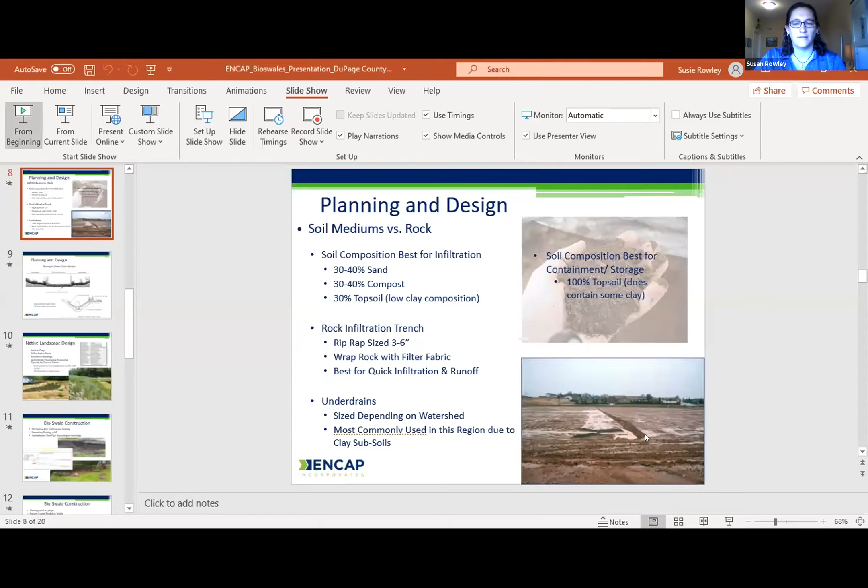And can you see that as well? Yes. All right.

The first being stormwater infiltration and capture. These systems can help reduce the runoff volume and also the runoff rate coming from a developed site. Some counties do allow for stormwater credits in bioswales and other BMPs as well. If you're going to get some of that capture, you might be able to reduce the size of other BMPs that are on your site.

Naturalized systems are also going to provide filtration and treatment. Carbon sequestration is just one of those. The main one we see is cleaning up pollution and things like oil, grit, and salt that are coming in from our roadways and parking lots. That's going to get treated when it goes into these naturalized systems, again, through those deep root systems.

This is also going to improve downstream water resources. Typically, these are just the first step in maybe a treatment of stormwater prior to it having to outlet eventually to probably a stream, or it may infiltrate into the ground. But either way, it's going to help treat the water before it gets released into those natural resources.

Two great benefits I see for wildlife habitat are goose reduction and mosquito reduction. Geese definitely do not like tall grass. They instinctually think that predators are going to be living there, and they can be, the coyotes and other things that can harm them. So they tend to stay in our turf grass. They love our turf grass. They don't go into those systems. So if you have more native plants on your property, you're going to get a reduction in geese.

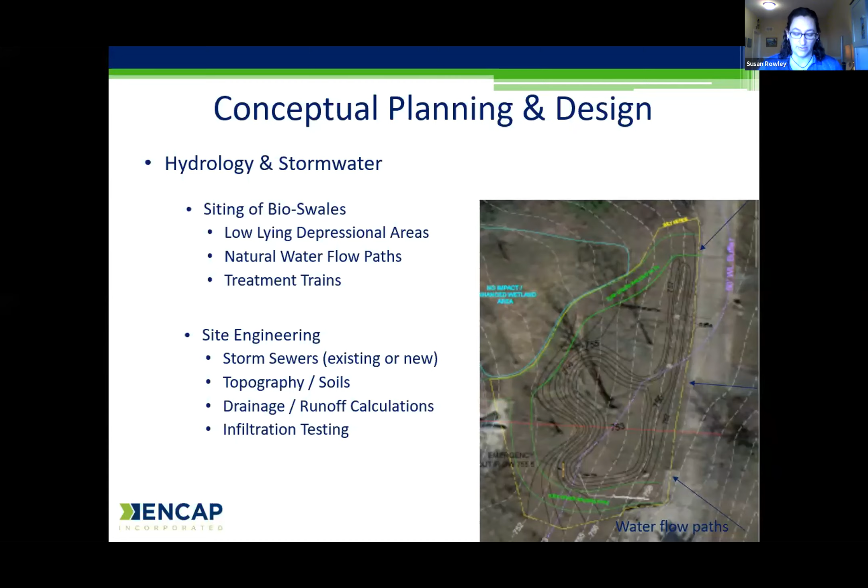It's also important to figure out what your project goals are prior to or during the planning and design phase of the project. Is your goal to reduce nuisance flooding? Is it to improve water quality or reduce non-point source pollution? Do you want to provide an open space amenity for the community? Is it strictly just to manage stormwater runoff? Do you want to also promote infiltration or stormwater storage? Or do you want to increase community awareness of the positive impact of these areas? Most likely your project will have more than one of these goals at a time, or might have all of them, but that's important to consider when planning your project initially.

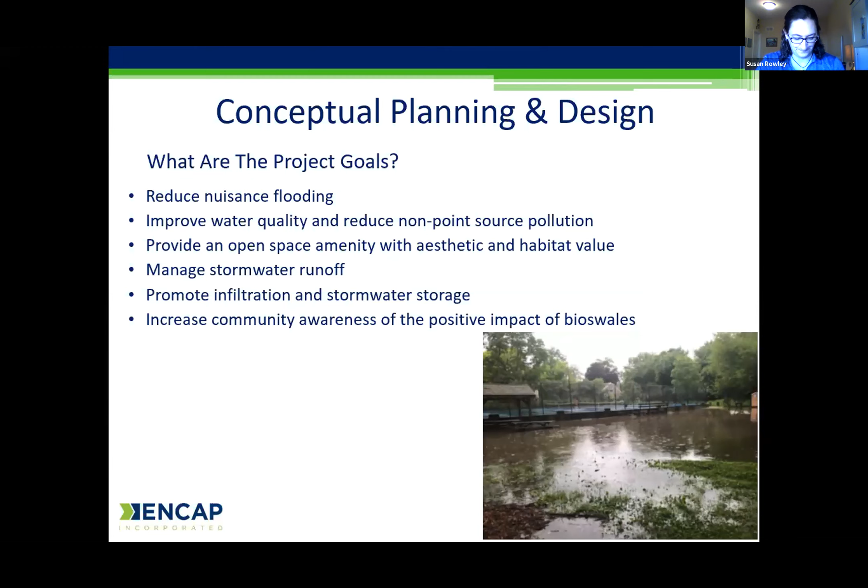Getting into a little bit of the nitty-gritty with the design, using soils versus rock. If you're looking to have higher infiltration rates, the best soil composition is a 30 to 40% sand mixture with 30 to 40% compost and about 30% topsoil, hopefully with a low clay composition. That's because clay is going to be more of an impermeable layer that you'll run into.

You might have a goal in your project to actually have more containment or more storage in your bioswale. Then you'd be looking at using more of 100% topsoil that does have some clay in it, so you get some of that containment that you might be needing.

For the best infiltration and runoff on your project, you might want to install a rock infiltration trench into the middle of your bioswale. We would recommend using riprap size 3 to 6 inches, and then wrapping that rock with a filter fabric, which helps with any sediment that might run off initially before the plants have established fully. It's going to catch that sediment so it doesn't clog up the system.

Also in this area, due to us having very high clay content in our subsoils, a lot of times these systems require an under drain. Those are going to be sized, again, depending on the watershed and how much water you have coming into your system and how much runoff you want leaving your system, but that's pretty commonly used in our area. It might be a little different if you're up in Lake County where they have more sandy soils and you might not need an under drain to help that infiltration.

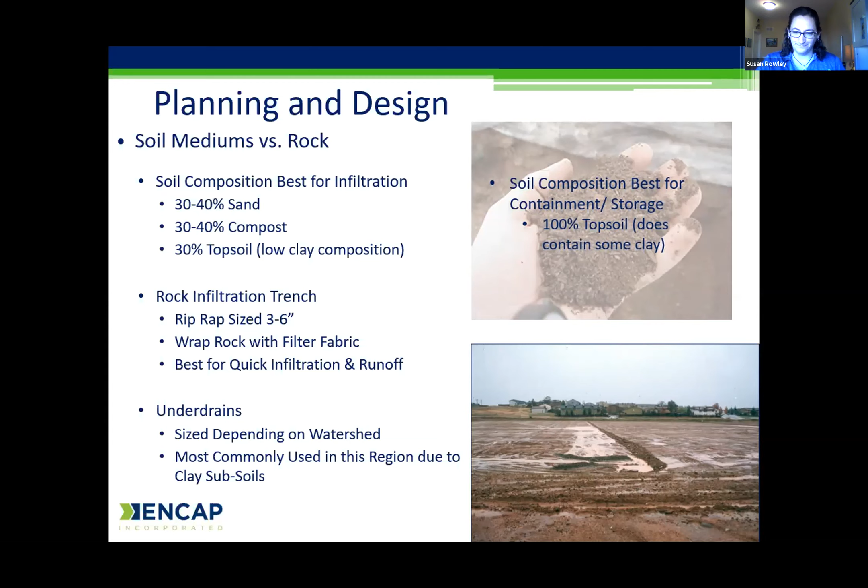Now we're talking about selection of plant material for your project. Again, the project goals are going to dictate what you want to install. If you're looking for more of a cleaner look, more of an instant result, maybe something that's going to be utilized by the public right away, and you want additional benefits from visual appeal, then you probably want to select plugs and mulch installation initially, because you're going to get more of that instant gratification than you would with seed. If you're able to wait for the results, then seed and erosion control blanket would be the way to go. These two pictures show the difference between plugging versus seed and blanket.

You want to make sure you utilize native plants that are native to this ecoregion and also suitable to the hydrology of your bioswale. So if you're going to have a bioswale with more water, you want to select plants that are hydrophytic and can survive in more of an inundation period in the water, versus if it's going to dry out right away, you want to select drier plants. Also, bioswales are typically in a visual spot that the public is going to see, so you want to pick aesthetically pleasing plants that also have a purpose. This plant list is just a short list we use on other projects for bioswales and rain gardens that are more showy. These include forbs or flower species, but sometimes grasses and things like that too, to provide that different structure.

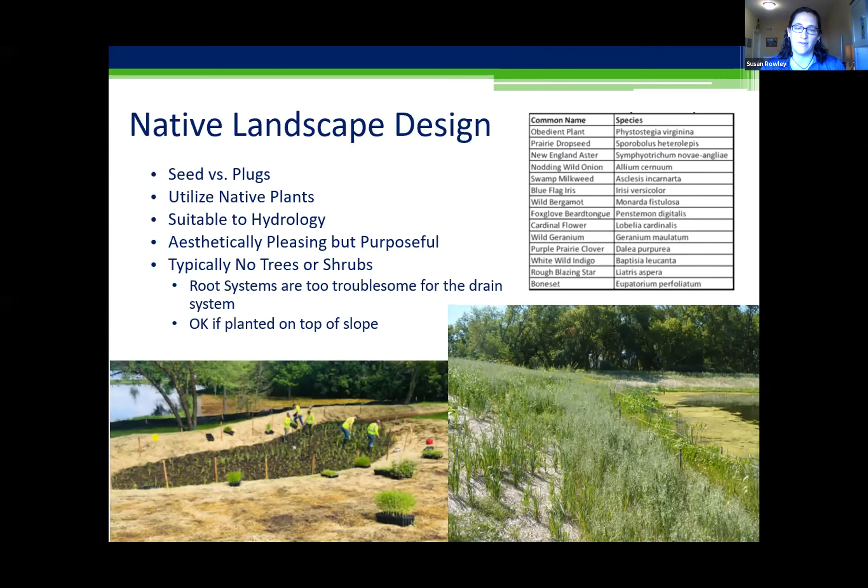So when we're looking at construction, you want to ensure that you install proper silt fence around your area, and maybe even some construction fencing. That's going to ensure that your site is protected as well as any adjacent sites. Obviously, make sure you call JULIE before you do any excavation or grading.

And most commonly used in these areas is heavy machinery, because it's going to be the most efficient use of time and resources to get the work completed. However, we would recommend, if you're going to be using heavy machinery, trying to use machinery that has low ground pressure. That way you get less soil compaction, especially if you're wanting to infiltrate into the ground. You're not going to want to compact that soil too much. If you can find the low ground pressure equipment that is about 10 pounds per square inch, that equates to about the human foot. That's what you want to try to utilize if at all possible.

Depending on your project and the design elements, you may or may not need to install an underdrain or riser pipe, depending on the hydrology. This is just a picture of one we installed with a riser pipe, because this project in Lake County had very high sand content, so we didn't need an underdrain in this case.

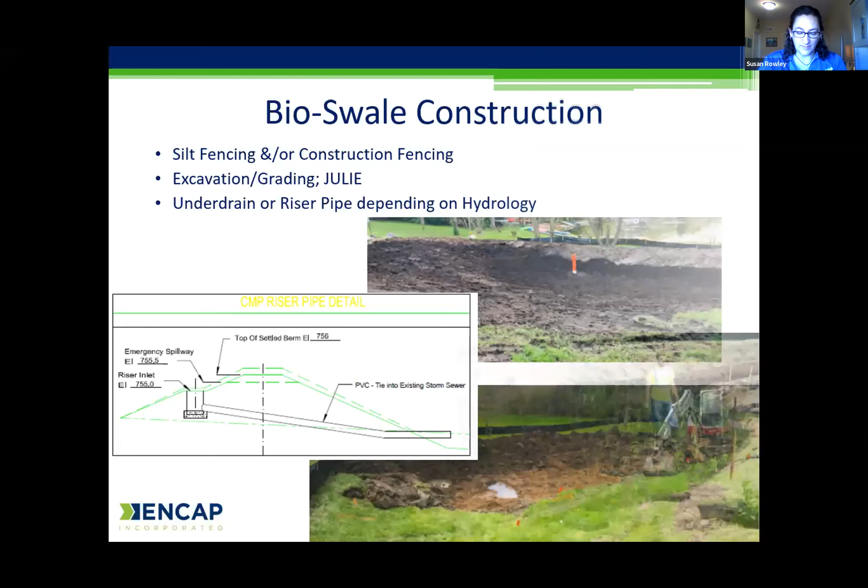Next comes planting. If you're going to use native seed and blanket, the native seed needs to be sown into the ground at approximately a quarter of an inch. You can use either a specialized seeder or do it by hand and rake it into the ground. If you're going to hand broadcast the seed, we would recommend doing it at two times the specified rate on the plans, because of the more uneven distribution you get during hand broadcasting versus it being drilled into the ground at a specific depth and rate with a drill seeder.

The proper erosion control blanket should be specified in the design stage. However, typical blanket utilized in a bioswale is an S150, a straw blanket, and that's if you're going to have no velocity or low velocity in your bioswale. If you are going to have some flows or water flowage in your system, you might need to use a heavier blanket - an SC150, which is a straw coconut blend, or an even heavier blanket that's all coconut fibers. The straw fibers of the blanket are going to break down much more quickly, which is why it doesn't hold as long. They usually break down in 2 to 4 years, versus the coconut, which takes longer, maybe 4 to 6 years.

Versus if you want to do plugs in your bioswale, you want to plant them in a hole suitable in size to hold the diameter and depth of the plug itself with its roots without damage. Then the soil excavated from the hole should be used to backfill around the plant and lightly pack it in.

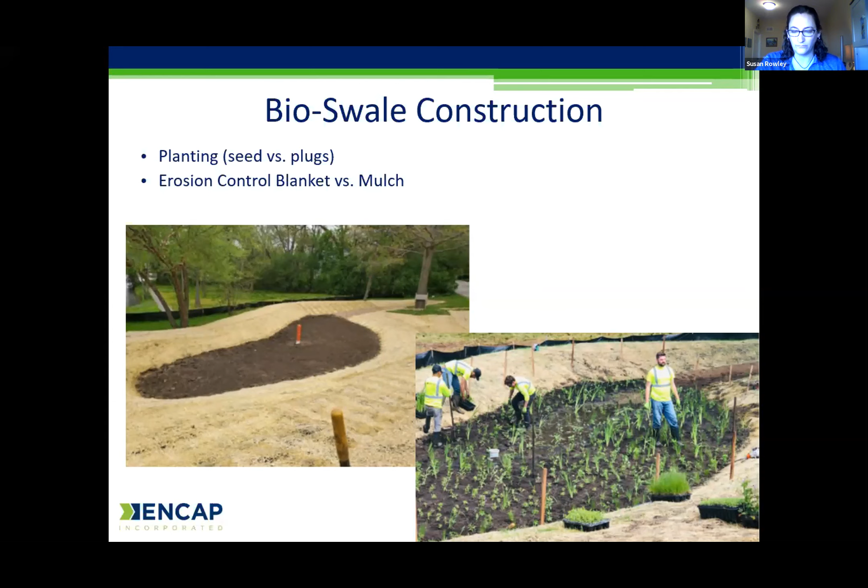So we get into the maintenance.

Timing is everything on this, and it's important to really be patient when it comes to native systems. Native areas take approximately 3 to 5 years to develop into maturity, and it's going to be a lot different than the instant gratification you might get from a turf, tree, and shrub sort of manicured look.

Typically, maintenance is conducted every 4 to 6 weeks, and this can include a wide array of things listed here.

If you're going to hand weed, you want to make sure you pull out the entire root system on your smaller sites. Otherwise, hand wicking or spot herbicide application. In Illinois, you need to be a trained certified applicator in the state to apply herbicide, so you want to make sure that's qualified personnel doing that.

You do hand cutting with hand machinery, or maybe mowing with a weed whacker or something like that on your bigger sites. You might need to remulch if you get some larger storm events, or replace some of the mulch, or replant as necessary.

There might even be some plant removal that's needed. We had a couple of projects where some of our native plants were actually out-competing our other plants that we planted, so we wanted to remove some of that growth so it didn't overcrowd.

Prescribed burning may or may not be needed on your project. If you have a smaller site, it's probably not needed, but on some of the larger sites it can be beneficial. Again, qualified personnel who are trained in prescribed burning should do that.

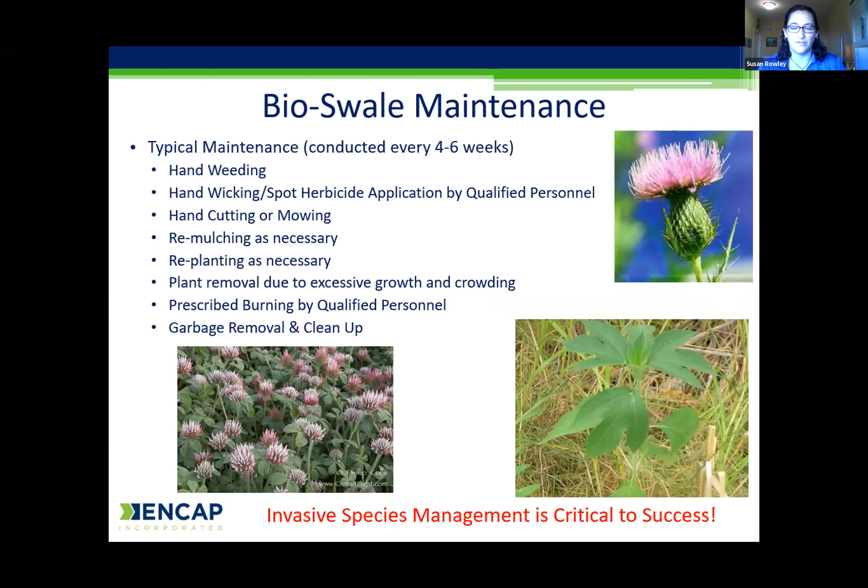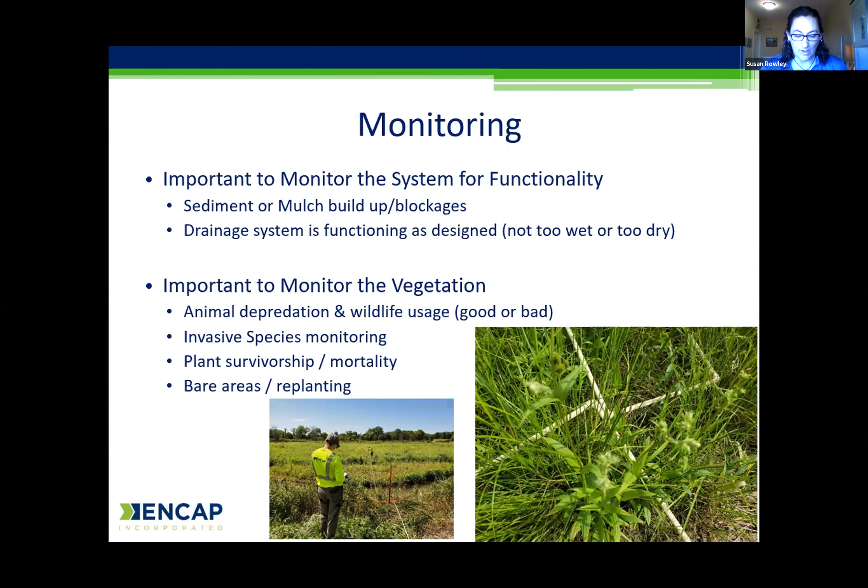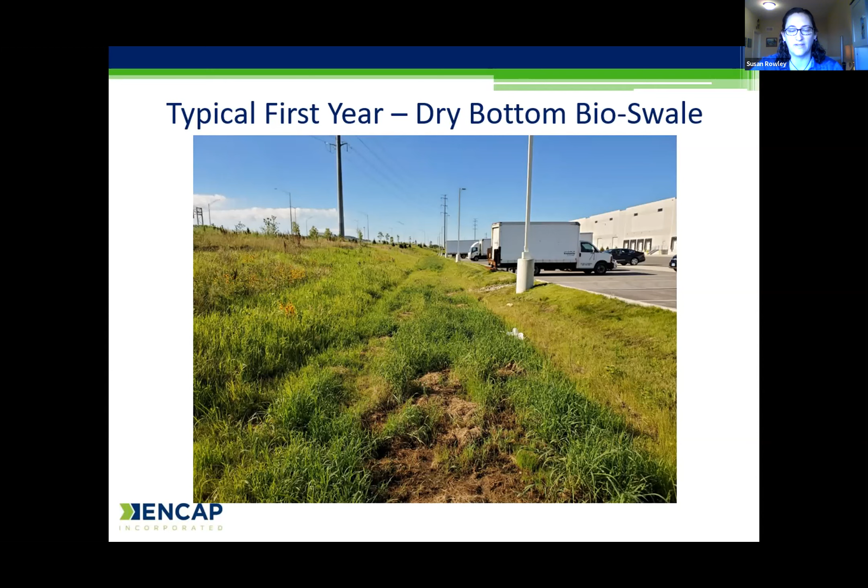Here I wanted to show a typical dry bottom bioswale. This is in the first year of development, so it's not very showy, mostly grasses at this point. However, it is functioning as designed, it's stabilized, and we know over time it will continue to develop.

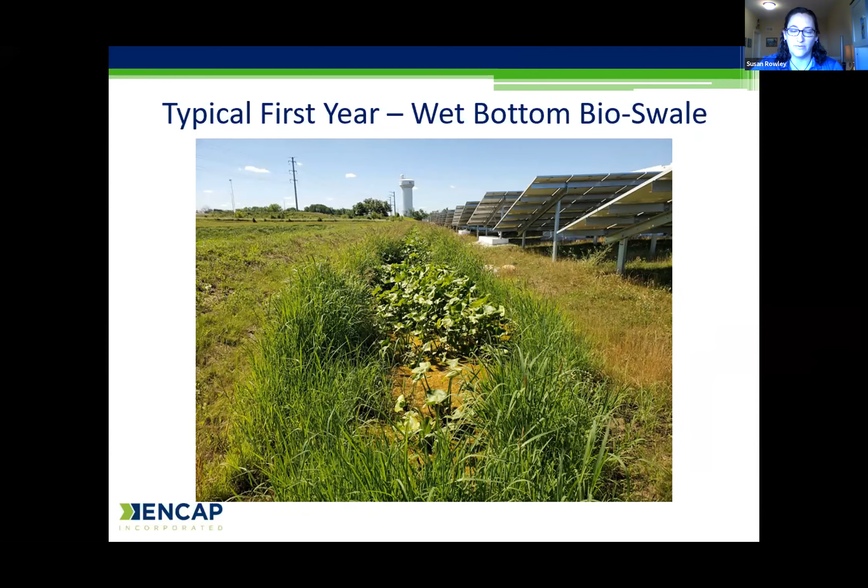Secondly, here's a typical first year of a wet bottom bioswale that has standing water in it year round. This one looks more developed because when you're plugging in plants in the bottom, they establish more quickly. This one is doing really well, functioning as designed, all stabilized for first year.

So some conclusions and takeaways: planning and siting is critical to the success of your project. Native species provide a beneficial function for your system. It's important to select appropriate species for the area and get a project design team, engineers, on board early in the process so it's designed and functions properly. Maintenance and adaptive management are key to success, so keep up with that. And expect the unexpected, be flexible. Things happen you may not expect, so be ready to handle anything that might come up on your project.

And that's all I had.

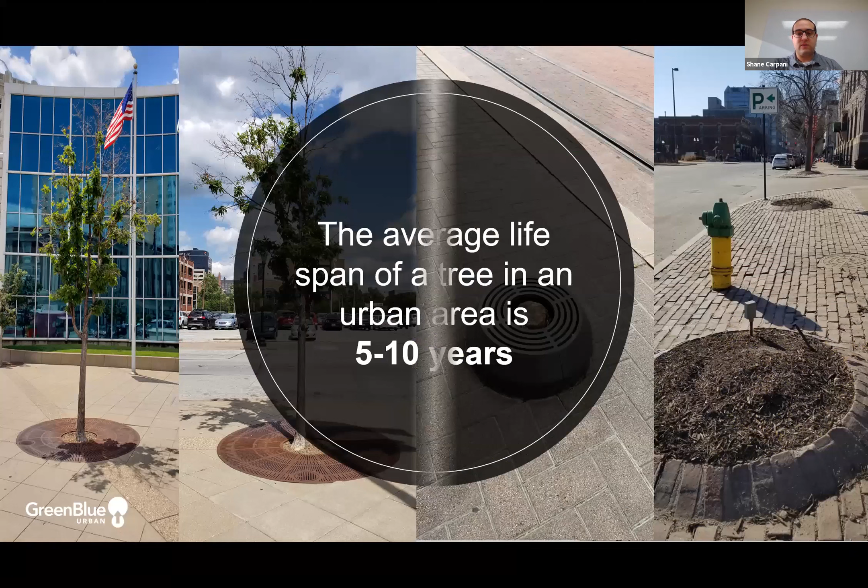Starting with this statistic: the average lifespan of a street tree is between 5 to 10 years. This isn't necessarily taking into account a park tree or a tree in a softscape setting — this is a tree in a hardscape, sidewalk, urban plaza kind of application, similar to what we're seeing on the screen here. When the average lifespan is between 5 to 10 years, that's really troubling because the benefits we want to see from trees — many well known, like oxygen creation, carbon mitigation, and shade provision, to others not so well known, like urban heat island reduction, noise abatement, wind deflection, traffic calming, health improvement — many different benefits that trees provide in addition to stormwater management. The thing about these benefits is that they happen as the tree matures.

The more mature the tree is, the more these benefits we're going to realize. And when the average street tree is dying in 5 to 10 years, we're not seeing much of those benefits. During those 5 to 10 years, the trees are stunted and struggling in their growth because of improper planting.

Similar to what we're seeing on the left-hand side of the screen here. The reality is that if we want trees reaching maturity and providing benefit, not only in terms of stormwater management, but also all these other benefits we've just mentioned briefly, we need to provide a root system for that tree. Healthy trees require healthy root systems. If we want the above ground benefits that trees can provide, we need to be considering the below ground requirements of those trees during our design phase.

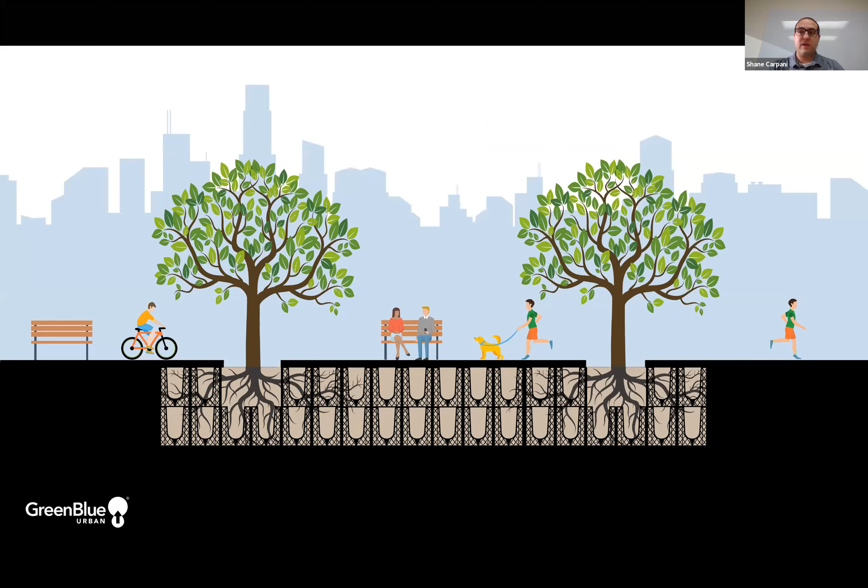Now imagine a row of healthy trees along a streetscape or an urban plaza area, and imagine the kind of rooting volume that we need below ground. It's a lot easier said than done in an urban environment where there's hardscape surfaces and utilities and building foundations and all kinds of different infrastructure that competes for that space.

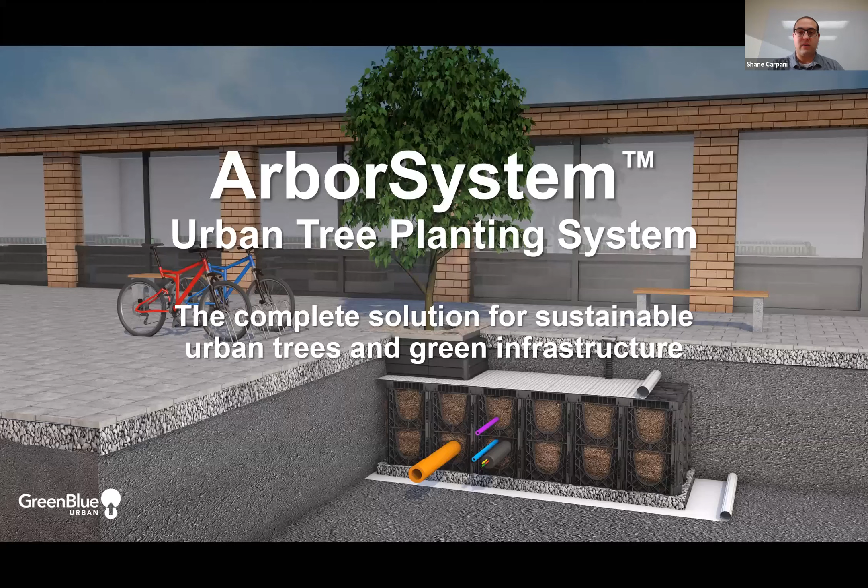And that's really where soil cells, or an ArborSystem, tree boxes if you will, comes into play. This marries the needs of the tree with the needs of the built environment so that we get both of those elements coexisting together, so that we can have that healthy, mature tree while ensuring the protection of our built infrastructure. So we can see this system here. It's a structurally load-bearing system that assembles below ground to provide support for a paved surface above it, while it's full of healthy, uncompacted soil that can be used for root growth and or stormwater storage.

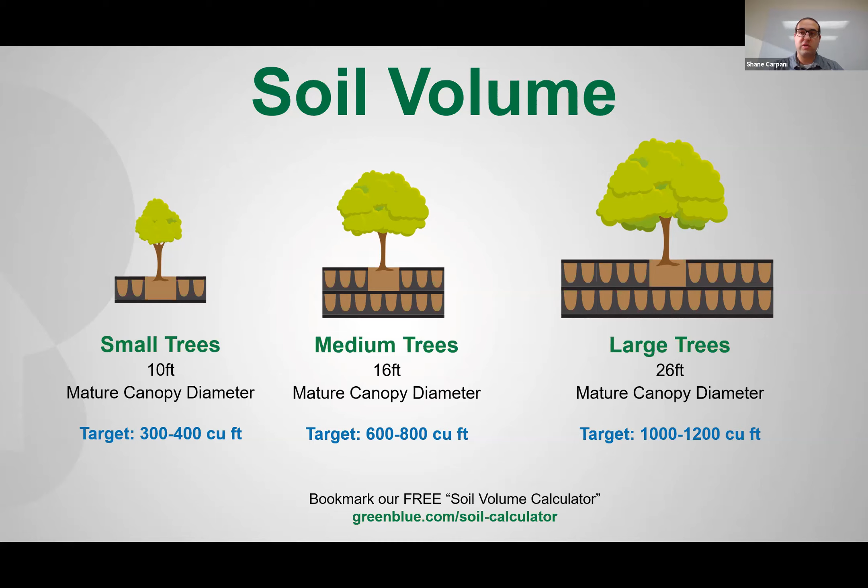The amount of soil that we need for any given tree depends on a couple of factors, being the species of the tree and also the mature canopy diameter of that tree. Depending on those factors, it can range from 300 cubic feet of soil requirement per tree to over 1,000 cubic feet per tree, in order for that given tree to reach what we would call its species potential. Now, these numbers, these targets we're looking at here are based on individual tree pits. One of the most common ways of accomplishing high soil volumes in urban areas is by linking tree pits together in a linear fashion, where those trees are sharing soil volume. We're going to talk about that a little bit later.

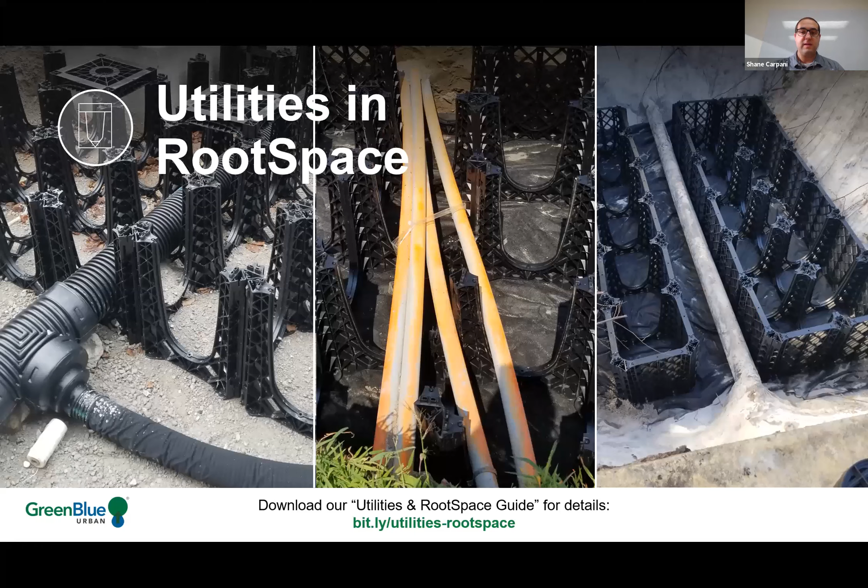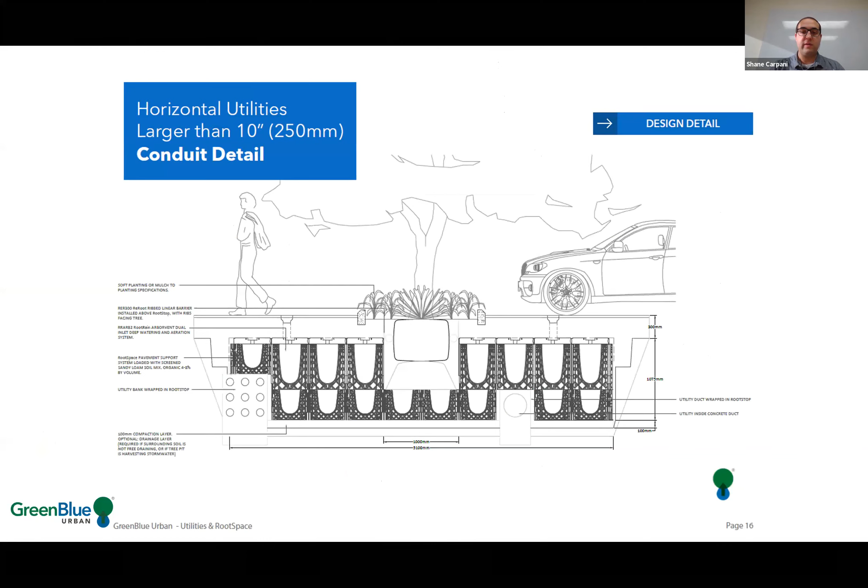So looking at irrigation and aeration, because soil volume is only the first consideration with a healthy urban tree. In addition to soil volume, we know that trees need oxygen and water. So we need to ensure that just providing that soil volume underneath the hardscape isn't enough. We need to ensure that that soil volume remains healthy long term. A key part of that is oxygen provision and water provision into it, and of course organic gases being allowed to leave that system, so that we keep healthy aerobic conditions within the soil and prevent anaerobic conditions from arising. So the soil cell system plays a vital role in that because of the uncompacted volume.

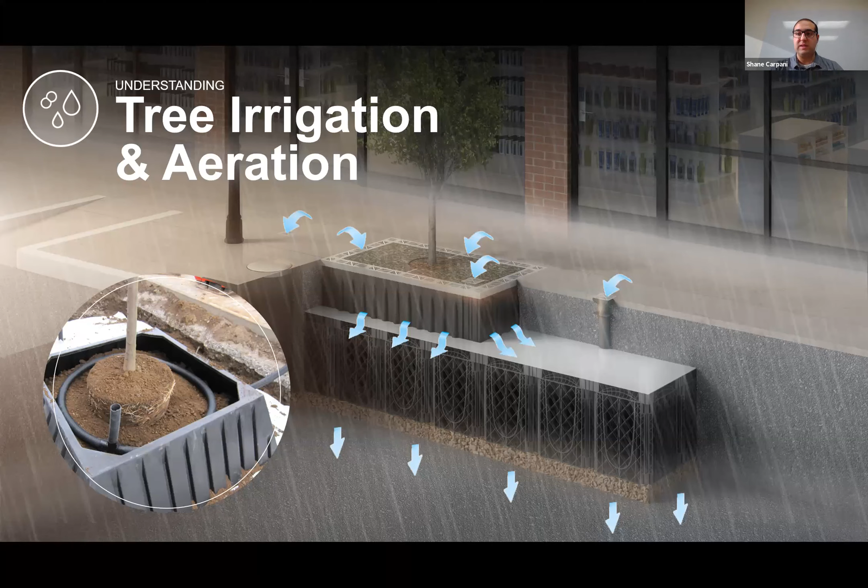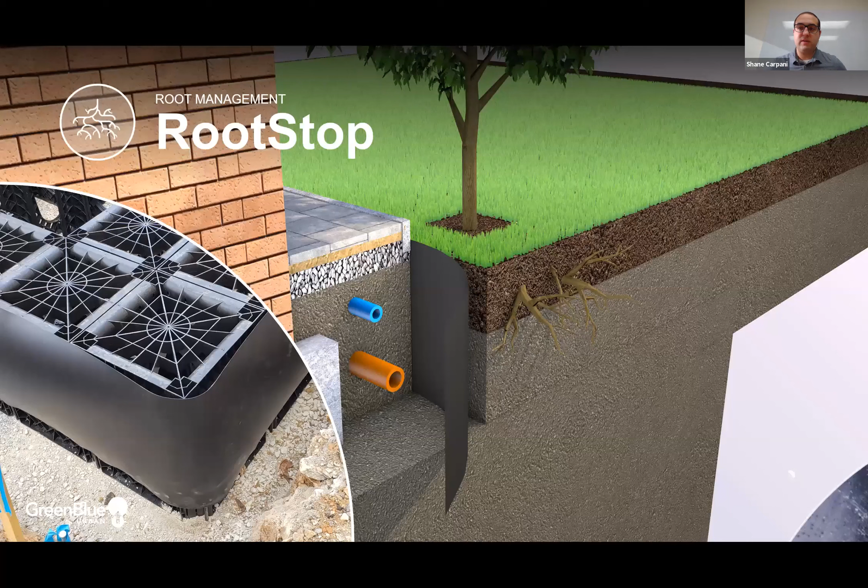We're bringing water and oxygen in through surface inlets, or vents if you will, similar to what we can see here, that are allowing water and oxygen to access the soil and also allowing organic gases to leave the soil, so that we get that healthy gaseous exchange and prevent a buildup of organic gases inside the soil. We also want to manage tree roots, because in urban areas where we have a lot of utilities and different elements, we need to ensure that the tree roots are staying within our intended rooting areas and away from paved surfaces, utilities, building foundations, whatever that particular gray infrastructure or built infrastructure might be.

Now here we can see a smooth root barrier like the soil cells. These are manufactured from 100% recycled plastic, and they allow us to run these along a building foundation or utility to help protect that building foundation or utility from root intrusion.

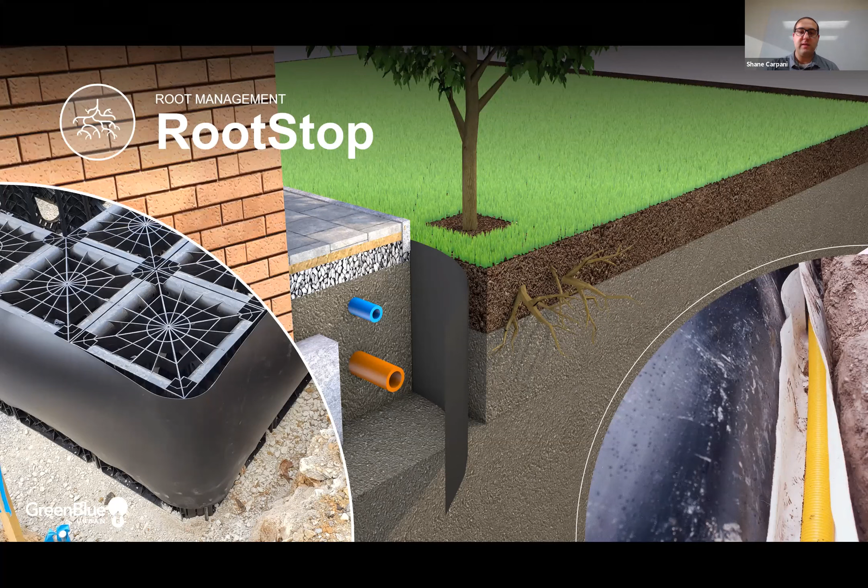Similarly, here we have a ribbed system. You can see the addition of the vertical ribs in this application here. And this is for directing tree roots downward.

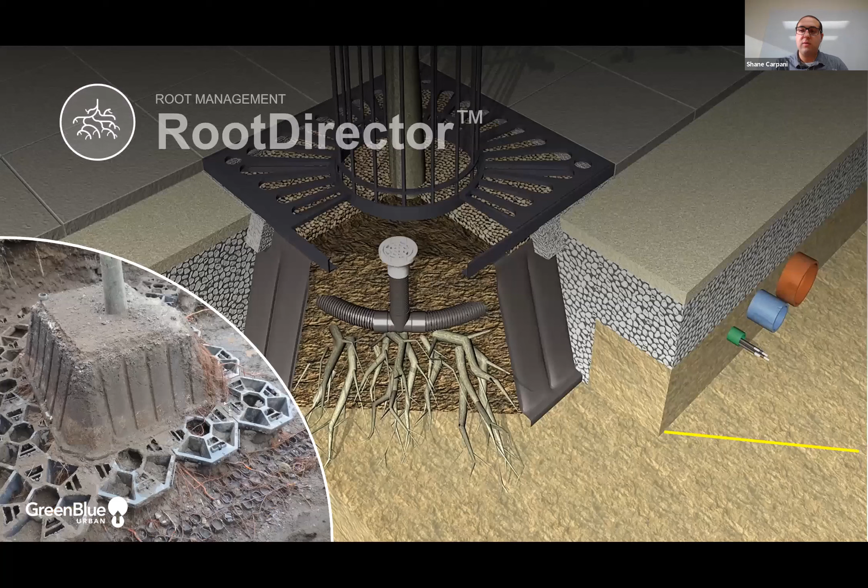So this is what we're using to protect our paved surfaces. These ribs direct the roots downward away from the paved surface and into the soil cell system so that we don't have roots colonizing immediately underneath the paved surface. And that's when we have pavement heave and sidewalk cracking and different issues that are often associated with improper urban tree planting. So we want to direct those roots down and away from that paved surface and into the soil cell system where they have plenty of adequate and healthy soil volume to exploit.

We look at stabilizing a tree, and we want to ensure that we're providing that support for a newly planted tree in its establishment phase. And what we're looking at on the screen here is an alternate to that more traditional guying wires and tree staking.

This is providing a couple benefits. Number one is that there is no maintenance involved in this. You don't have to go back years later and remove guying wires and tree stakes in many cases, which is not done over time. And they can end up being a detriment to the tree when they're not removed over time. They start girdling the tree trunk, etc.

Now, this also provides for the free sway of the trunk of the tree, which encourages fibrous root growth out of the tree. So it helps establish that tree. It's available in different anchoring types depending on the specifics of the application.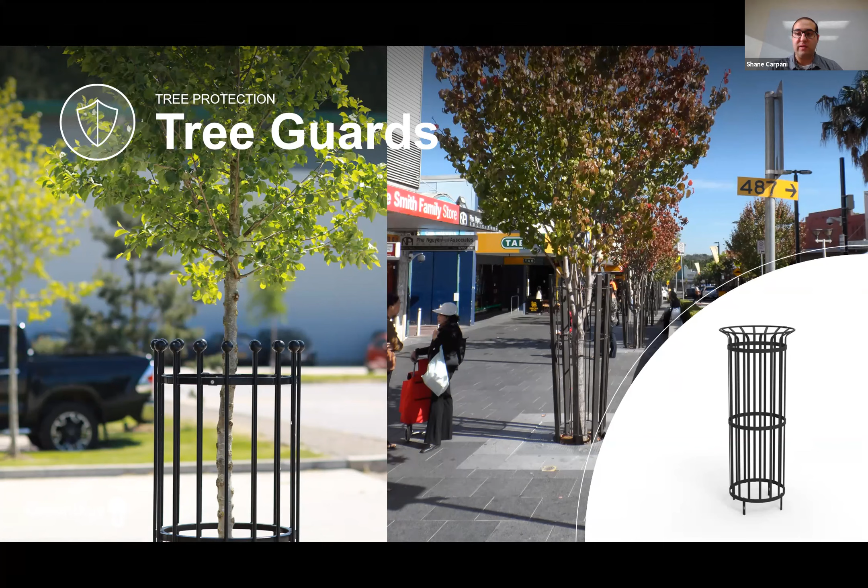Or it could be through a tree pit fence or a raised planter type application here instead of a grate and guard. Less important about what it is and more important that we're just considering that need of protection during the establishment phase of the tree, because those first 3 to 5 years of a newly planted tree's life are really the make it or break it point.

If we can get the tree beyond those first 3 to 5 years and protect it from vandalism, whether it be intentional or unintentional pedestrian vandalism, bicycles being locked to trees are a very common cause of tree damage and premature tree mortality in urban trees. If we can help protect that tree in those first 3 to 5 years, its chances of long-term survival and maturity rise exponentially after that establishment phase.

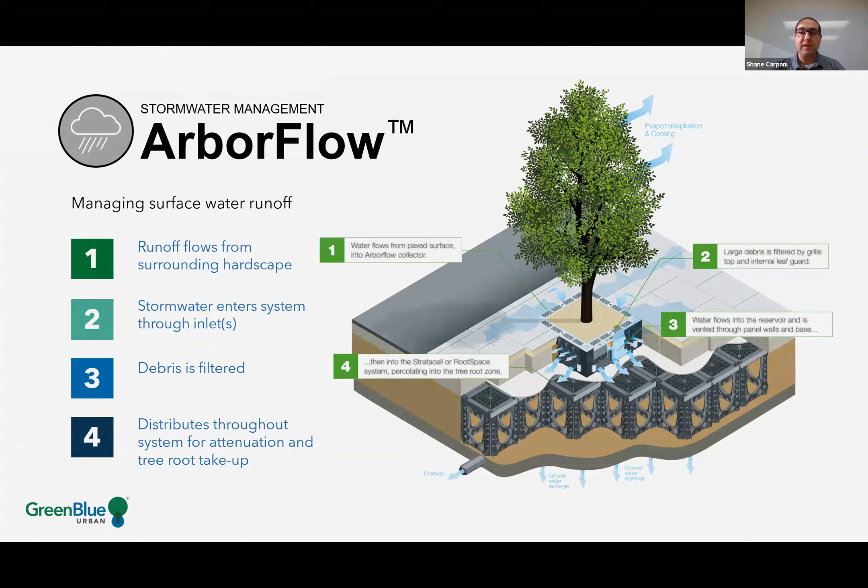So now that we've talked about how to accomplish a healthy tree, we'll take a look quickly at how to use those tree boxes or engineered tree pits to help us manage stormwater. And because we have this healthy uncompacted soil volume in the system, we can use that soil volume to attenuate stormwater.

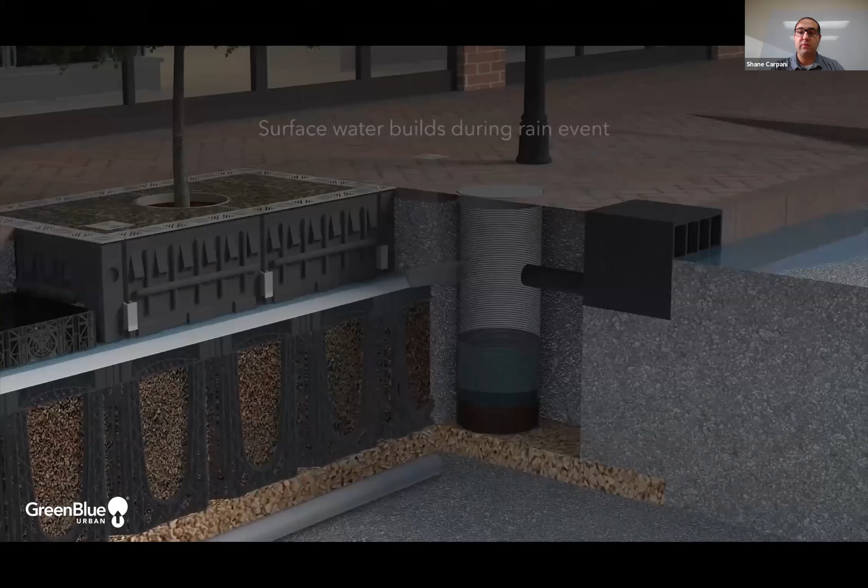This short animation here is going to show some different ways to bring the stormwater into the system, whether it be through a curb inlet or a catch basin, removing silt and sediment, bringing it into the system. It could be through a linear drain, as we're seeing around the tree pit opening there. The linear drain can also be along the back of a curb in many applications. We can see stormwater entering through the ArborVent inlet that we talked about a few slides ago.

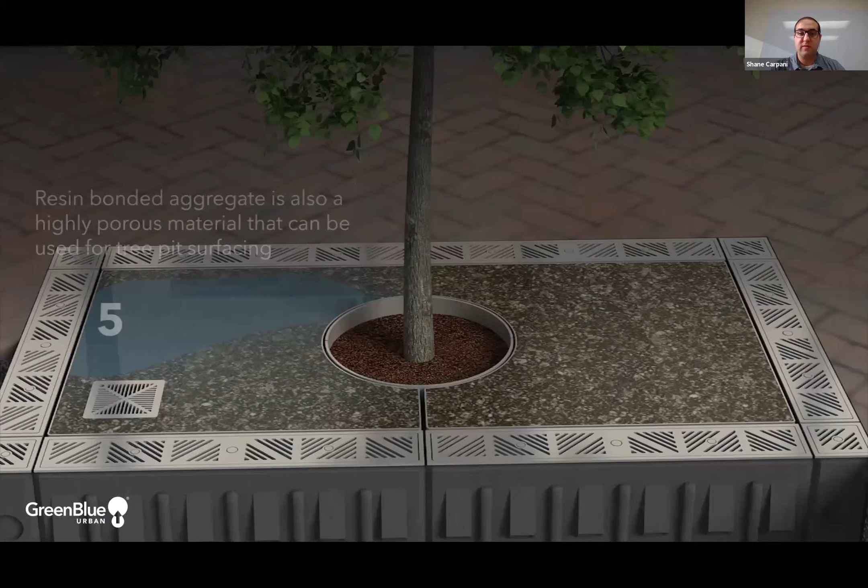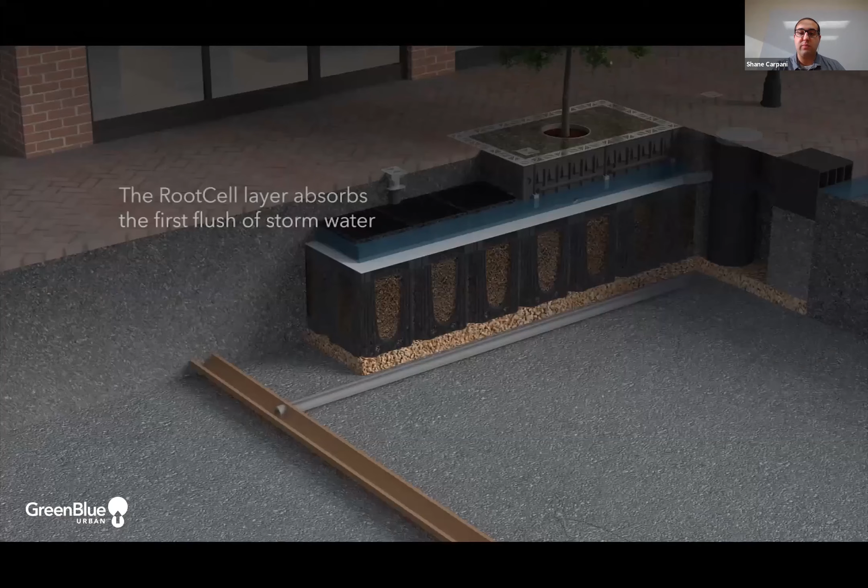Stormwater can enter through a permeable paver surface, allowing percolation down through the permeable surface into the soil cell system below, or through another permeable surface like a resin-bonded aggregate or decomposed granite material. Regardless of how we bring stormwater into the system, it's distributed throughout the soil profile for attenuation and tree root take-up, with any excess drained out through the base layer via an under-drain tied into the storm sewer and infiltrated into surrounding groundwater if possible.

At that point the water is much cleaner because it's used the soil to filter out suspended solids, and the tree helps filter nitrogen, phosphorus, and other elements. So it's doing two things: improving quality and reducing quantity, since the tree takes up stormwater as irrigation, reducing the quantity that comes out.

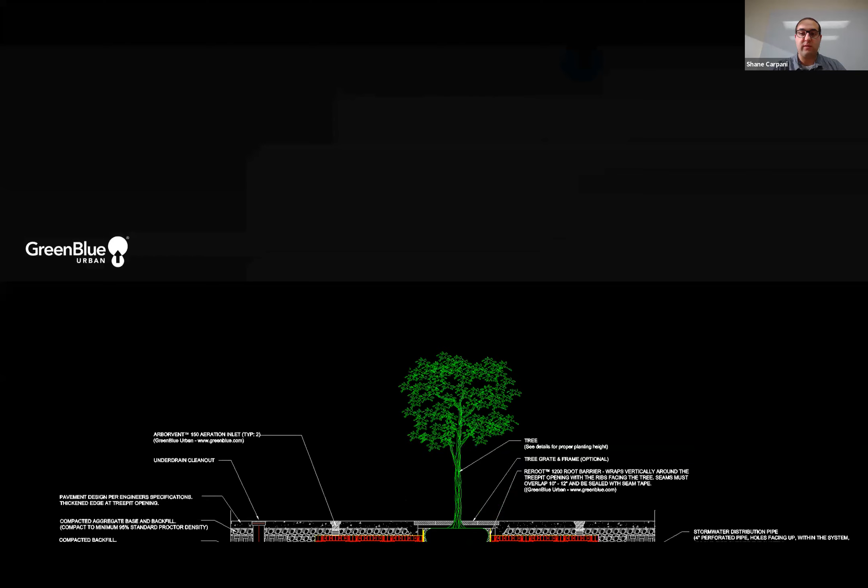These modules can also be used for stormwater storage. When we're not planting a tree in them, they can be left void of soil, completely empty, and wrapped in a membrane—either permeable for infiltration or impermeable for detention. The benefit of using this system for that application is that, because of its strength, it can sit very close to the surface, and because of the 97% void space, we maximize usable area and reduce excavation requirements.

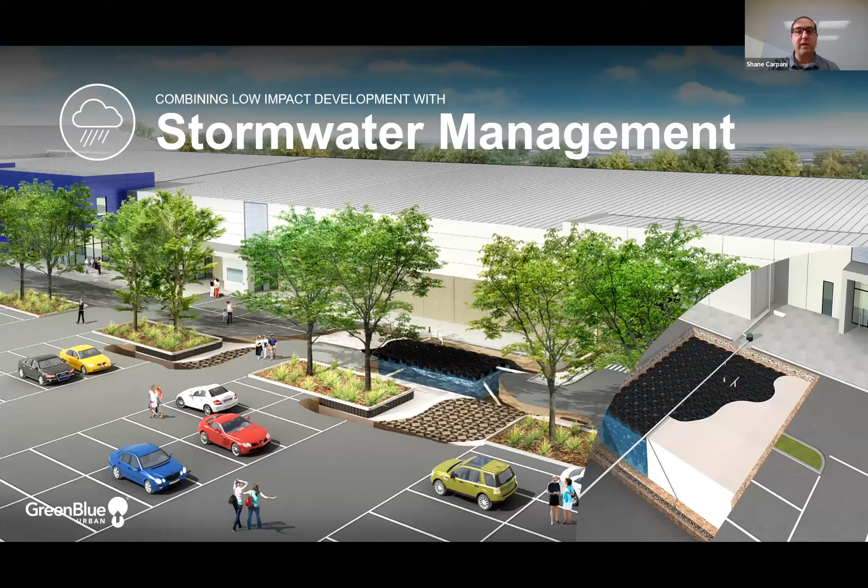This rendering was done for a Costco project where they used both functions of the system together. They take the rooftop runoff from the Costco building and bring it into modules that are empty and wrapped in an impermeable membrane to store the stormwater, then use that stormwater to irrigate the tree plantings along the parking lot.

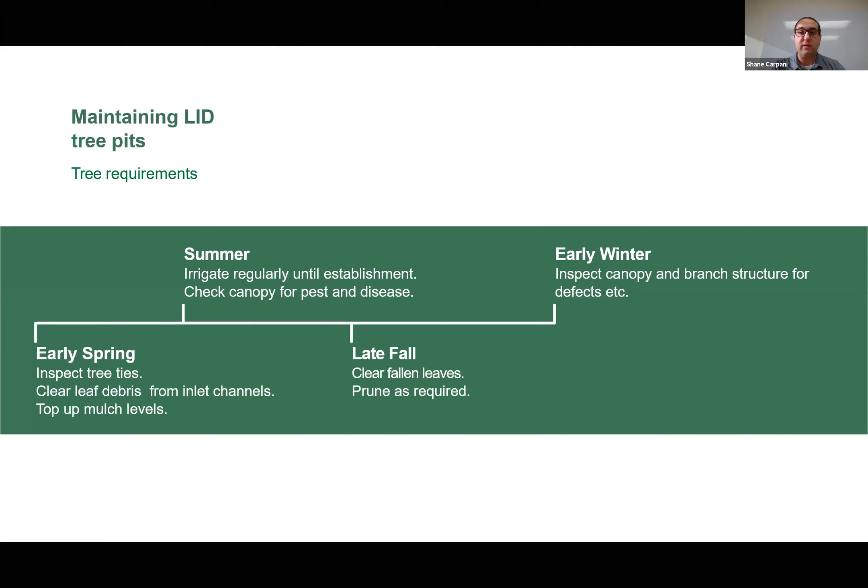Looking at maintenance, there are two levels involved. Number one is maintenance of the tree itself—structural pruning, removal of leaf debris, etc. Then, when bringing stormwater into the system, we need to ensure the inlets are free and clear of debris and not clogged, which would stop the system from functioning. Depending on the inlet used—curb inlet, linear drain, permeable surface, or whatever method channels stormwater in—there's associated maintenance involved.

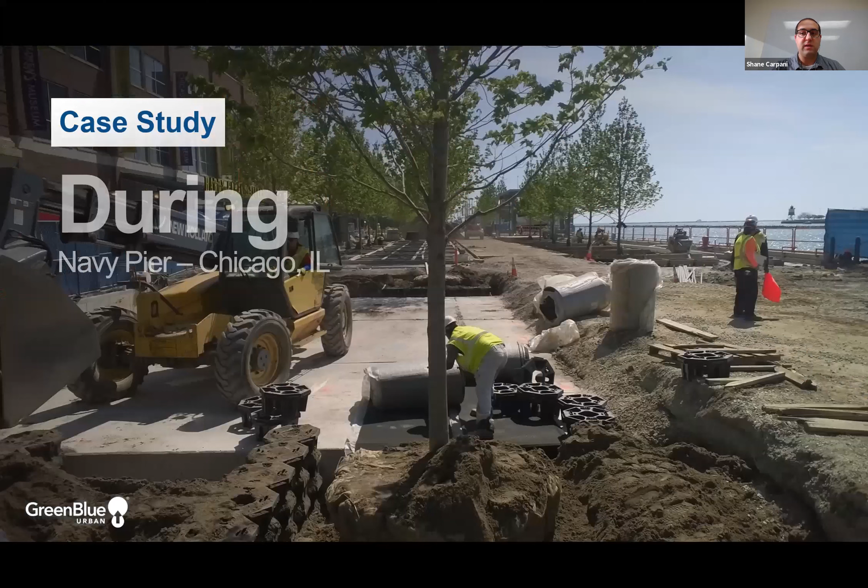Looking at a few case studies: the Navy Pier in Chicago has used the soil cell system throughout the trees in the pier area. Here we see the project shortly after completion, and here the trees two years later, doing phenomenally well. Even in this completely urbanized, hardscape environment, these trees are thriving as though in a forest-like setting, all while ensuring there's no pavement heave or subsequent pavement failure.

So even in the harshest of urban settings and hardscape plaza environments, trees can thrive as though they're in a forest-like setting when they're designed properly and considered for in that design phase.

The River Walk in Chicago, this is the River Theater. Our system is being used to provide support for these trees. This is also a green infrastructure application. The rainfall and runoff that lands on the staircase is channeled within the system to prevent as much runoff as possible.

Here's a nice comparison case study of a project in Boston showing these trees on this street, this block, were planted in 2015. We can see 1-year results and then subsequent 2-year growth results, just showing how well these trees are thriving even in this heavily urbanized downtown Boston environment.

Pace University in New York City, here we can see a permeable paver surface with the RootSpace system underneath it, allowing for percolation down into the system below to provide attenuation and stormwater management.

So there are a few resources here on the screen. Be happy to take any questions that might have come up, Chris.

Chris, I think you're muted. Sorry about that.

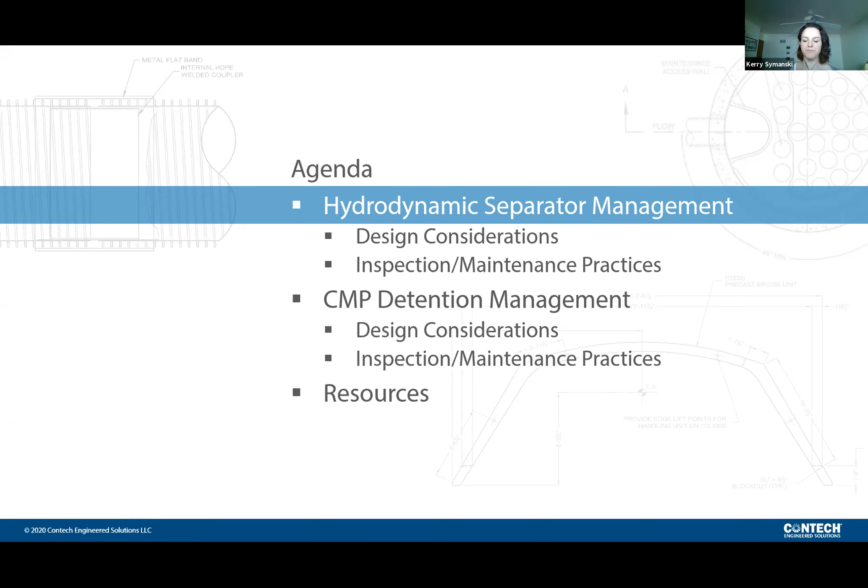We'll spend most of the time going into the deep dive into maintenance, what's required for both inspection and maintenance, what sort of tools that you need, how and when you do it, and going through that entire process. But I wanted to take a step back first and kind of walk through the actual design of these products as well. Believe it or not, maintenance is actually a huge factor when we go through the actual design. We'll actually implement on where these units are placed on site.

So starting off, what is a HDS unit? An HDS unit is a water quality unit whose job is to treat incoming flow from a developed site.

So like I mentioned, if you were having a new grocery store put on site, all that impervious area created by the parking lot and the building needs to be treated and sometimes stored as well. What the design of the unit revolves around is usually dependent on what the unit needs to treat.

For example, that could be trash capture, TSS or total suspended solids removal, sediment capture, or even oil capture as well. It can also depend on where the project is located. DuPage County, for example, has a specific requirement that HDS units need to be sized for 80% TSS removal and 80% oil capture for a developed site. So the units can be designed around that specific regulation.

There are plenty of HDS manufacturers on the market, Contech being one of them, but the basic design and layout of the HDS unit is fairly similar across the board. There are three fundamentals you can see on the screen on how these units work.

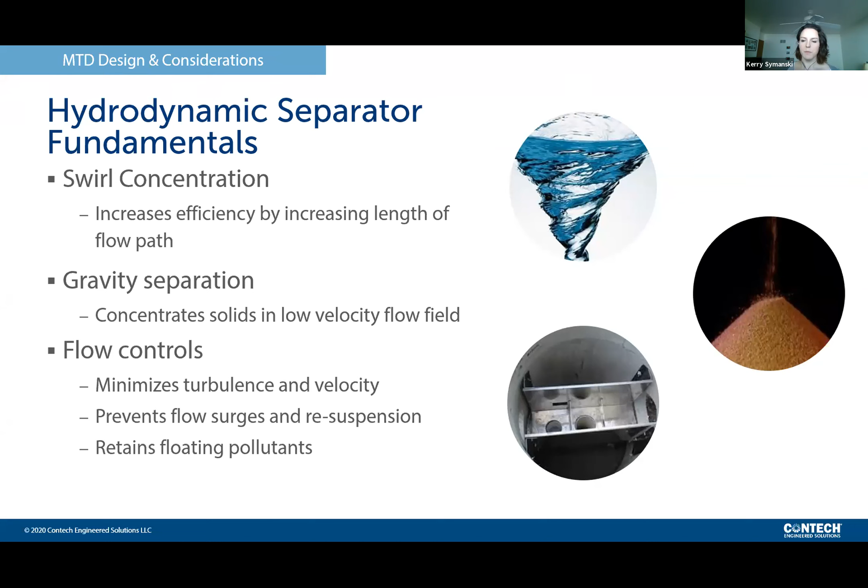For example, if we're working in a site where we have depth constraints, if there's shallow bedrock or utility concerns, you might end up with a vaulted HDS unit like this because you don't have the standard depth availability that you would with a manhole.

Another option, if there are massive flows on site, for example if we're working with a large manufacturing plant or something like that where they're going to have a lot of runoff, you might actually see a kind of joint system like this, where you'll have a separate bypass structure for peak flow events.

And then of course it does have some sort of flow control to make sure that everything that is stored remains in the unit until you do maintenance.

Regarding maintenance, the most important question is how to get to the captured sediment and how do you get it out. When you're going out to perform maintenance on any HDS unit, it's important to know the certain layout of the actual unit that's there and whoever the manufacturer is. It's going to help you determine where that sediment's being stored and how to get it out.

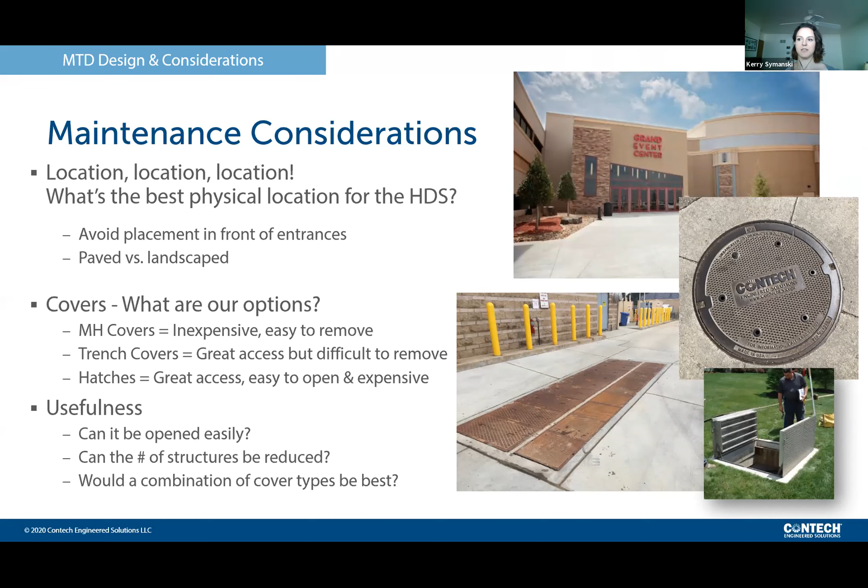This could also depend on what type of cover the HDS unit has. Most HDS units in the DuPage County area are just going to be standard manhole covers, so not too much different than looking into a standard catch basin. However, if you are working with a vaulted unit or sometimes a very large unit, you'll have different types of covers such as trench covers and hatches. It's important to know this because sometimes for trench covers and hatches, you'll need additional equipment to go and inspect and maintain the unit just to get those hatches open.

Okay, so now that we just kind of have a background on the design, let's dig a little deeper into the maintenance aspect. We'll cover quickly on what's required for both inspection and for maintenance before we go through the actual process on how to do it.

Inspection is just as important as maintenance. Inspections for these units are generally pretty quick, but you'll need to make sure that you have everything you need and know what to expect before you go.

Like I mentioned before, it is important to know the unit's location. Is it obstructed in any way? What sort of cover does it have?

It's most important to know what kind of unit is in the ground. Who's the manufacturer and what type of model is it?

Every manufacturer on the market does have a standard operations and maintenance guide. These are usually provided with the drawings on the unit when the site is being installed, but they can usually be found free of charge on their website, or you can just reach out to the local contact and they'll be able to assist you.

Why is this important and why do you need this? The way you figure out when an HDS unit needs to be maintained is by the sedimentation level that's accumulated in the unit itself. Each manufacturer, while the fundamentals of the unit are exactly the same, the actual layout might differ, so the sedimentation levels and when to maintain will be specific by manufacturer. That O&M guide is going to help you determine when maintenance actually needs to occur.

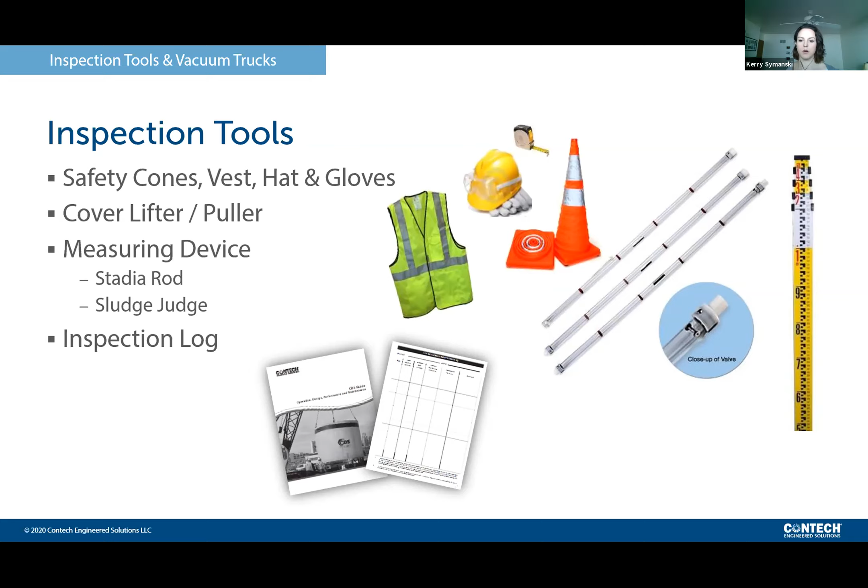The second most important thing that you'll need is your measuring device. I listed a few common ones on the previous slide, either a stadia rod or a sludge judge. This is what you'll need to measure the sedimentation level inside the unit.

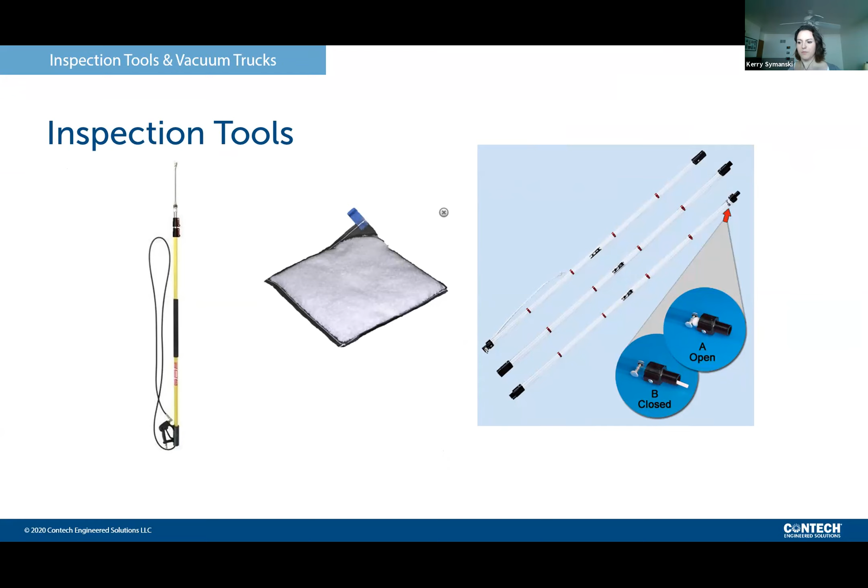Because one of the best features about using HDS as an underground application for water quality is that you do not need to enter the unit to inspect it or maintain it. It makes both of these practices very easy, quick, and cost effective because you don't have to worry about confined space requirements as well.

Okay, now let's move on to maintenance equipment. Let's assume that you're working on a site and you inspected it and maintenance needs to occur. What will you need? Well, for any standard HDS device, you will just need a vacuum truck.

There are a few options that you can use here. The technology varies. The two main technologies used both have their place. You can likely maintain any system with either technology, but it ultimately comes down to efficiency.

The most commonly used are fan units. It's kind of like a big shop vac. It's great at handling dry material, especially dry material that gets caught up in a stream of fast moving air and deposited into the tank. It is important to know that while these are less expensive to keep running, this cannot pull from a full column of water.

On the other hand, you might have a positive displacement or blower unit. These are not as common, but they act like a great pump and they're great at moving high liquid content, especially at longer distances. There is also the availability of using a vac trailer.

These are typically small urban trucks that are used in ultra urban environments. These are great for getting into parking garages or other hard to reach areas. They're smaller and they're lighter, usually coming in between 5,000 and 15,000 pounds, compared to a standard vac truck, which is around 25,000 pounds.

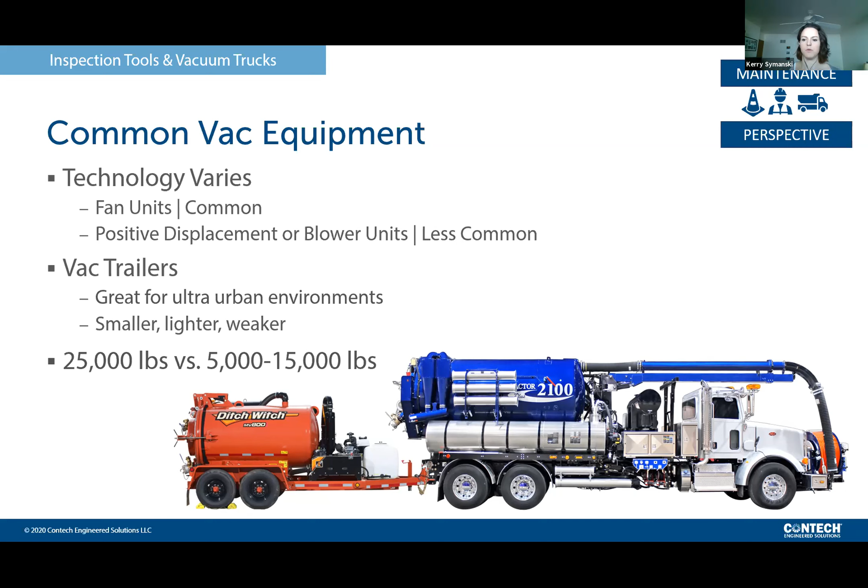It's important to know the differences because what truck is needed is going to be determined by what's on your site. So this is why it's important to know what sort of site information that you're dealing with. Where is the unit located and how is it going to affect the truck that you can use? You'll need to know how deep your truck can pull, from how far away can they pull.

It usually comes down to efficiency versus capability. Vac trucks are most efficient in depths less than 30 feet. The shallower, the better. If you're dealing with an application that's 40 foot plus, or more of a landscaped area where the truck's going to have to pull from a farther distance, that maintenance is going to take a lot longer and it's going to affect the actual cost and lifespan of the maintenance cycle.

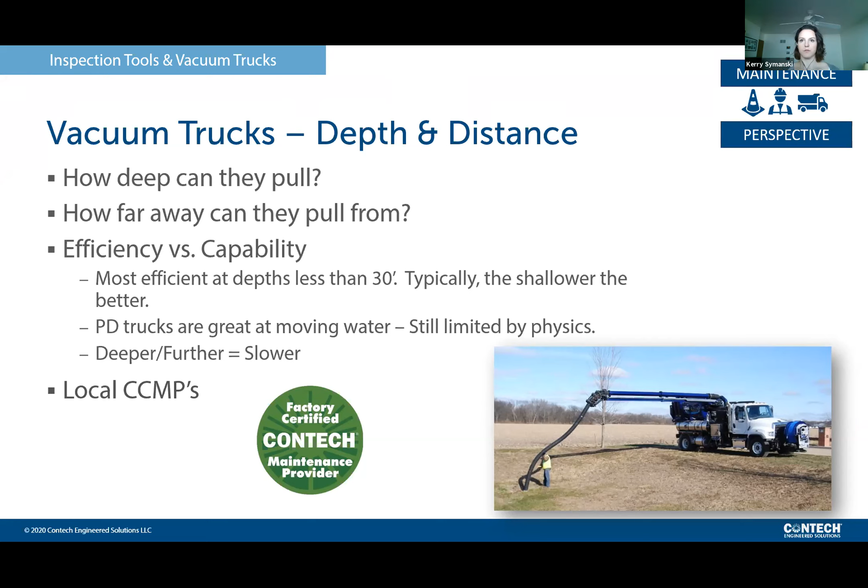Again, use your manufacturers if you have any questions. Contech specifically has certified maintenance providers that are experts on maintaining these systems and would be more than happy to help. Same goes for any other manufacturer. It's our job to help you with this sort of stuff. So if you have any concerns on site about products being maintained, or if you're unsure what sort of truck or equipment you should be using, please reach out to us.

Okay, now let's get into the nitty-gritty and actually talk about how to inspect and maintain these units. Like I mentioned before, there's no need to enter the unit. Inspections are very quick and they're just as important as maintenance.

When do you inspect? We recommend inspecting HDS units twice a year as a standard. The most important inspections are within the first year, as you can really see the amount of sediment that accumulates over a standard year of performance, and because the site is still stabilizing.

But probably the key point here is to keep records. If you've been inspecting a unit regularly, it will help give you a better idea, understanding, and estimate of when maintenance will actually be required, especially if you're responsible for inspecting and maintaining a plethora of units. Keeping logs on where each unit stands gives you a better idea of when you actually need to go out there and maintain. This goes back to what I mentioned previously about looking at the manufacturer's O&M log, because they actually come with inspection records that you can keep up to date for each unit that you are maintaining.

So what are you looking for when you're doing inspection? You're typically looking for three things. First being floatables. You're going to want to check if the level of floatables within the swirl chamber could potentially be expelled. This means that the level of floatables in the water is pretty high to the top of this chamber, and assuming a storm event occurs, they could actually be expelled outside of the unit and pushed further downstream.

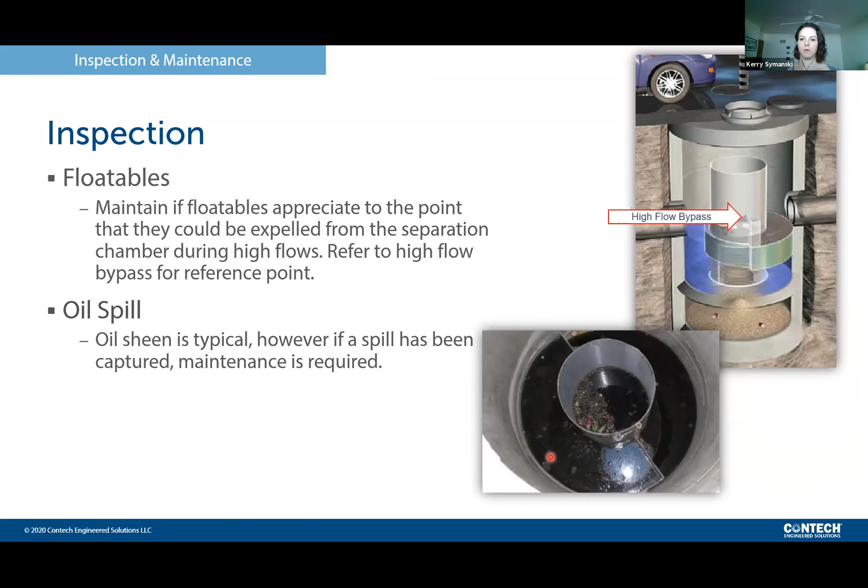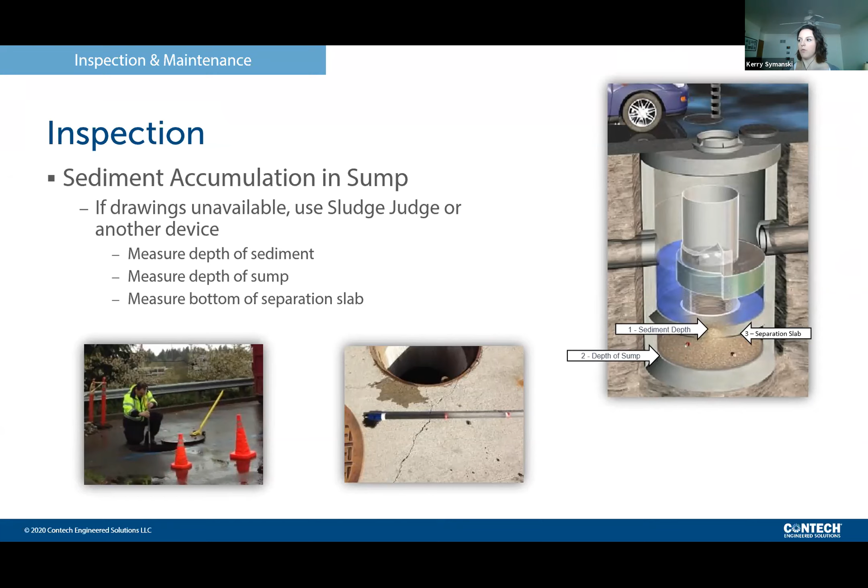But most importantly, you're going to be looking for the sediment accumulation in the sump. That's why your most important tool out there is going to be your measuring rod. What you'll be doing is measuring the sediment accumulation that's happened within the sump of the unit. That's why it's important for you to have the O&M guide to really know how much, and at what point, you need to create maintenance based on the unit and size of the unit that's in the ground.

Here's an example of what this would look like. This is the O&M guide for the CDS unit provided by Contech in the area. For Contech specifically, we recommend maintenance when the level of sediment has reached 75% of the capacity of the sump. This means that the sediment takes up about 75% of that sumped area. Based on the model size that we have in the ground, what you'll be doing is measuring from the top of sediment to the top of the water surface area.

We have listed distances. This is your minimum distance allowable for maintenance. So if you're working in an area and the unit, let's say for example this 4-foot unit right here, if you have a distance that's less than the specified distance here, that's when you know maintenance is going to be occurring.

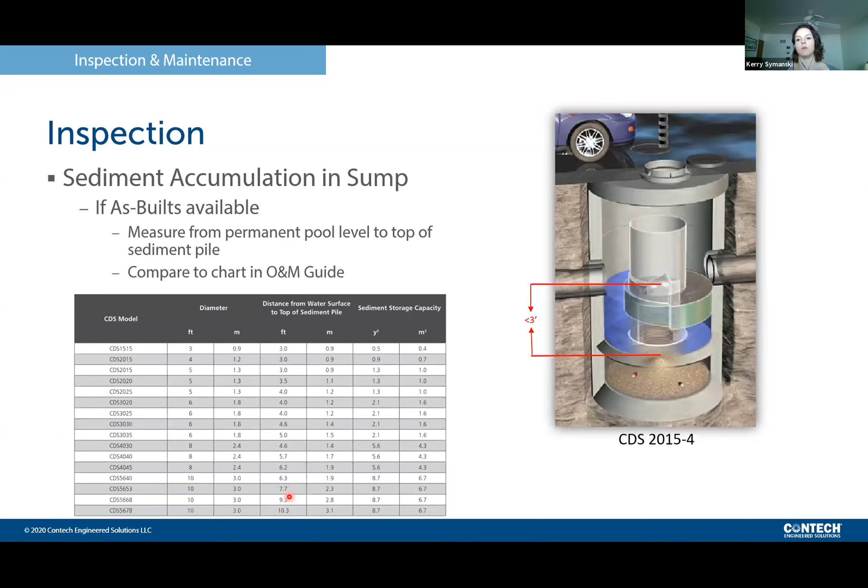Okay, now assuming that you go out and inspect an HDS unit and you know it needs to be maintained, what do you need to do? Very, very simple. Like I said, there's not a lot of tools required. The only thing you really need is a vac truck.

No need to enter the unit. You'll just stick the vac hose down the center of the unit, straight through the swirl chamber and into the sump right there. You will vac down the center of the system, removing any floatables, water, sediment, and oil that's accumulated within the sump. It's important to note that you should be spraying down the internals as you go, just to break down any buildup that's occurred over the operation of the unit since the last maintenance period.

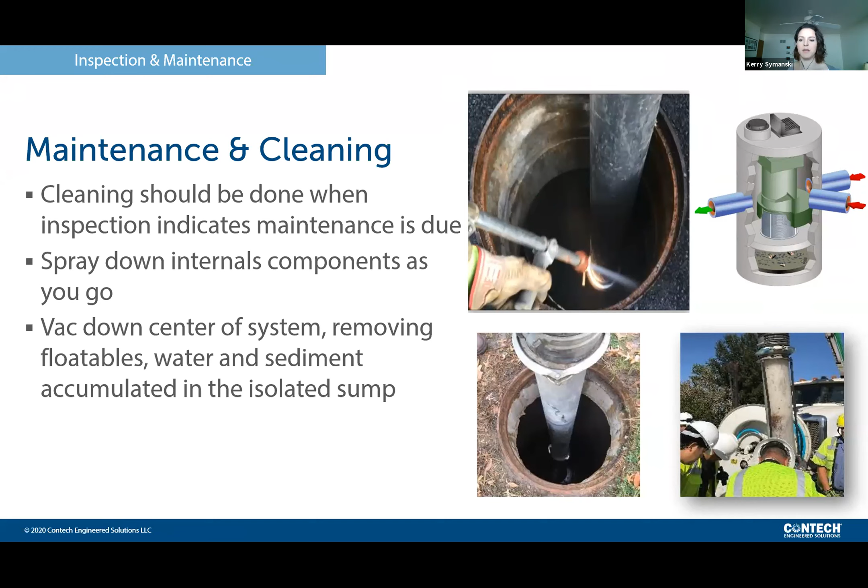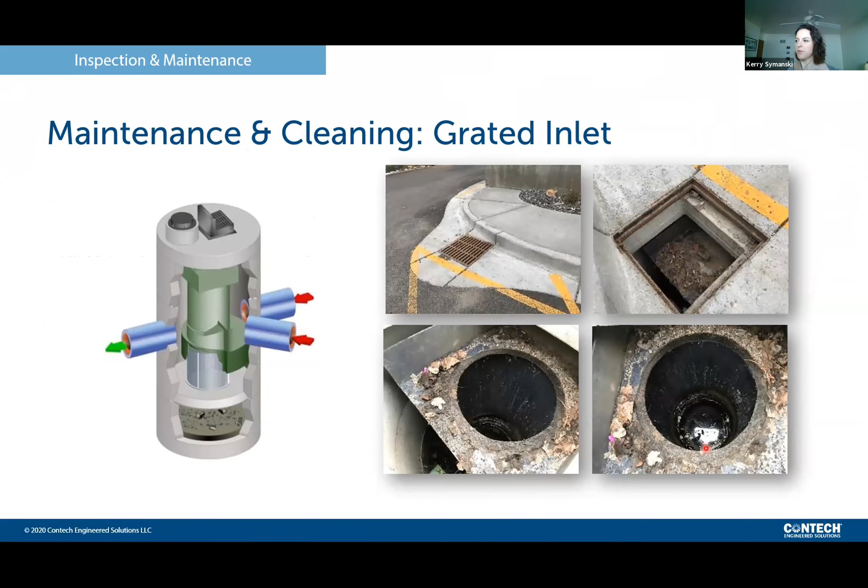If you're working on a unit that has a grated inlet from surface flow, the maintenance process is exactly the same. You'll just have an extra step of cleaning the debris away from the deflector pan, but it's the exact same practice—you just stick the hose down the center of the sump and clean everything out.

Here's an example of one that was maintained not too long ago. You can see a picture taken down, looking into the swirl chamber, showing the water level and all the floatables that have occurred. No need to enter the unit; they just stuck the hose down the swirl chamber and into the sump. This is what it looks like completely dry afterwards, with the bottom of the sump clean.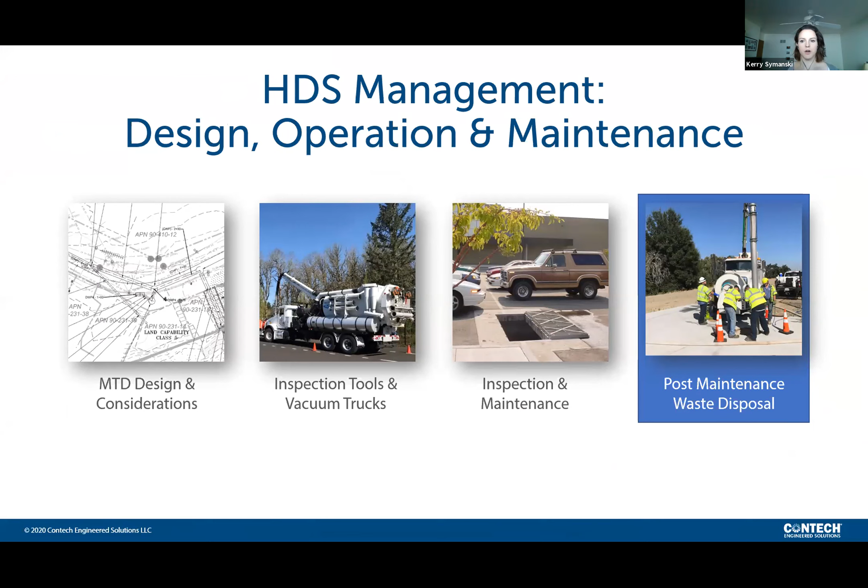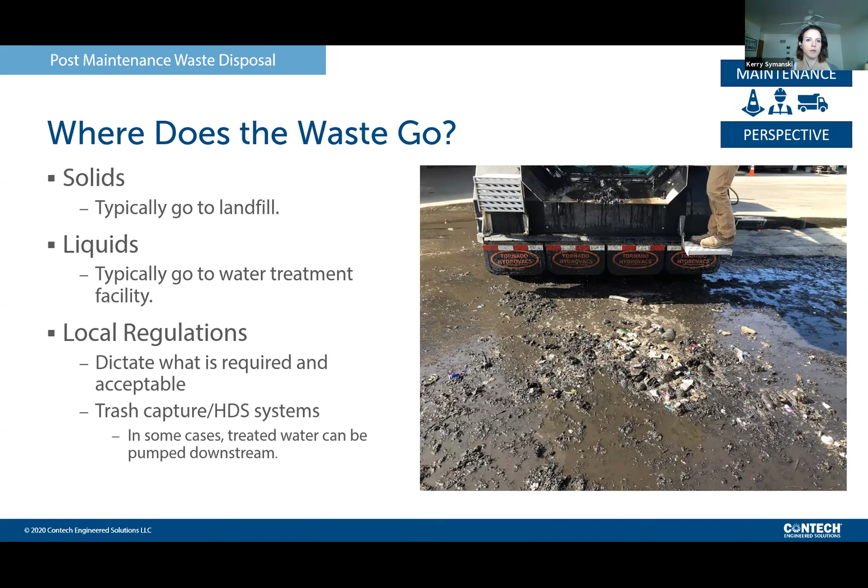I did add a few slides on waste disposal. It's typically not talked about often, but it's important to question where the waste goes. Solids will typically go to a landfill, and liquids will usually go to a water treatment facility. This is usually dictated by local regulations, so check with your county on where this waste should be going.

It's usually split into two types of facilities, whether municipal or privately owned. For privately owned, the landfill will usually take the solids, and treatment plants will take liquids or a mixture of solids and liquids. The liquids are treated and released, commonly to municipal sanitary systems under contract with the municipality. The pricing for treatment facilities varies widely depending on location.

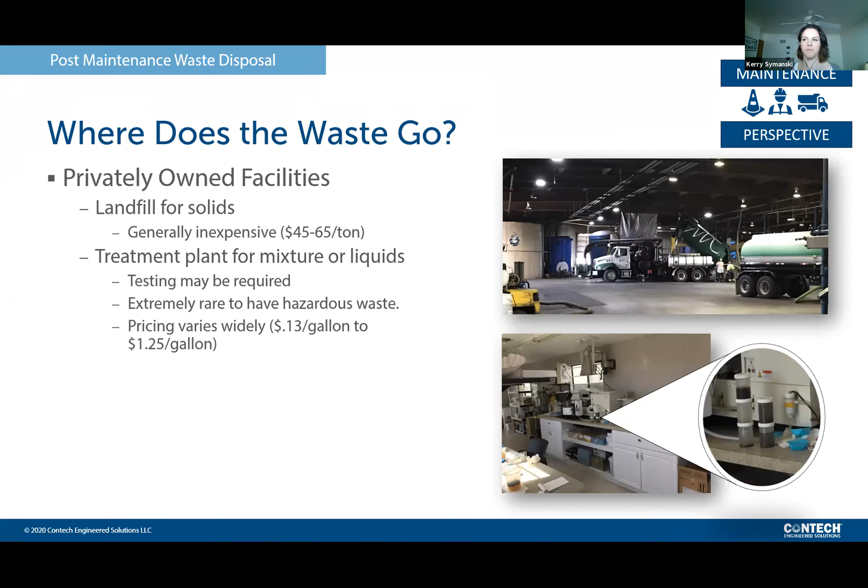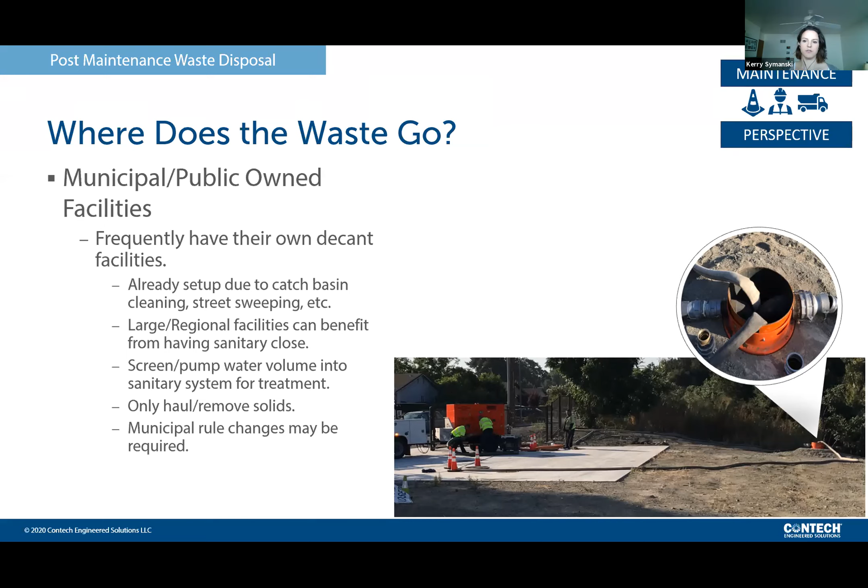Most commonly, waste will go to municipal or public-owned facilities because they frequently already have their own facilities set up due to existing needs like catch basin cleaning and street sweeping. They can utilize these facilities to separate the loads, sending solids to the landfill and treating the liquid waste themselves.

And that's pretty much it. These product lines made for HDS units are designed with ease of maintenance in mind. We want to make sure the unit can continue to function for long periods without continual upkeep or being a hassle. For inspection of HDS units, they're typically inspected once or twice a year. For actual maintenance, it depends on the size of the unit and the site it's treating, which is why it's important to keep inspection records—it helps you guesstimate when maintenance needs to occur and get on a standard schedule. Typically for HDS units, you're looking at about every 2 to 3 years for maintaining it.

So we have a few more minutes, so I'm going to spend that discussing corrugated metal pipe underground detention, going through the same process: design considerations, then the actual inspection and maintenance process as well.

Designing with maintenance considerations is just as prevalent when designing with CMP detention. Location is just as important—where the system's located. Most of these are going to be located on lots or drive areas, but there are some in landscaped areas as well. When going through the design process, the most important location is where you're going to put the access risers. Very similar to an HDS unit, all inspection and maintenance is done through these access risers, so their location is incredibly important.

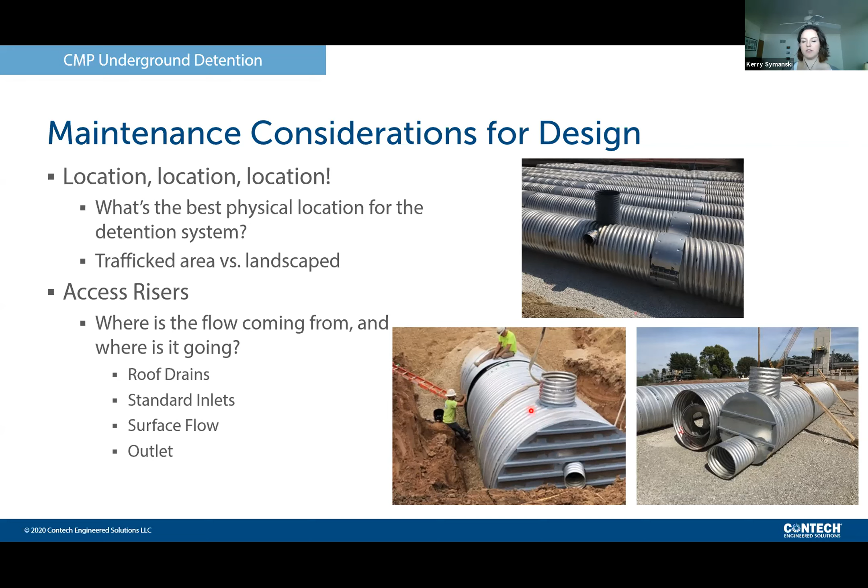When designing a system, you'll usually see access risers placed above any major inlets, because that's where the sedimentation will be coming from. This is still a gravity-fed system like an HDS unit, so when flow enters through the inlet, most of that sedimentation will occlude and drop to the bottom right where it first entered the system—that's where you'll see most of your buildup, so you'll want an access riser there. You'll also see some sort of access point by the outlet of the system, usually to make sure the outlet orifice isn't clogged and water isn't getting stuck in the detention system longer than it has to be.

For maintaining and inspecting these, the good news is that everything discussed previously with HDS units is completely applicable here—so I hope you were listening. The same maintenance guidelines can be followed because you're basically using the same practices and procedures. Just to note, this focuses on CMP detention, as it's what's commonly designed and used in the area. There are other underground options, such as concrete or HDPE chambers. Unfortunately, underground detention isn't quite like HDS units, where maintenance practices are generally the same across the board per manufacturer.

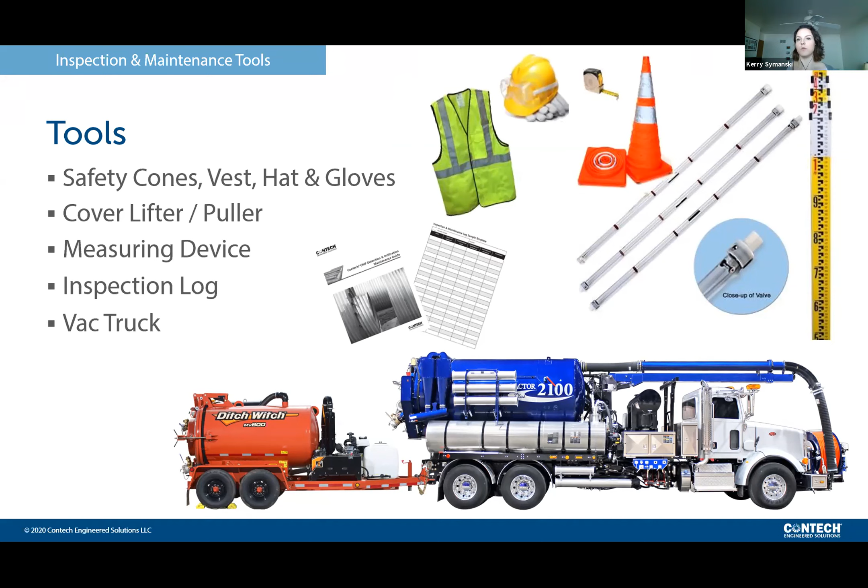The size of the system and material used is going to have a huge impact on your maintenance practices, and that's because it comes down to where those access risers are and where they can be placed based on design. For metal pipe, the material is extremely flexible regarding manufacturing, so we're able to have multiple access points directly into the system for ease of maintenance. If you're working with a different material or design, always check with your manufacturer to make sure if there's any additional material or equipment needed when inspecting and maintaining.

As for inspection of CMP systems, they're typically inspected a little more often than an HDS unit, and that's because you'll have additional inspections during the winter months. This is incredibly important, especially for an area like Chicago that relies heavily on de-icing salts or sanding. You want to make sure you do extra inspections after winter months, because there's potential for these sanding or salting agents to accumulate in the system, so you want to pop in and see what's going on inside.

The benefit about underground detention, unlike HDS for CMP, is that you can enter directly into the system. It's very easy to pop in and take a look at what's going on, check the inlets and your outlet orifice without having to worry about confined spaces.

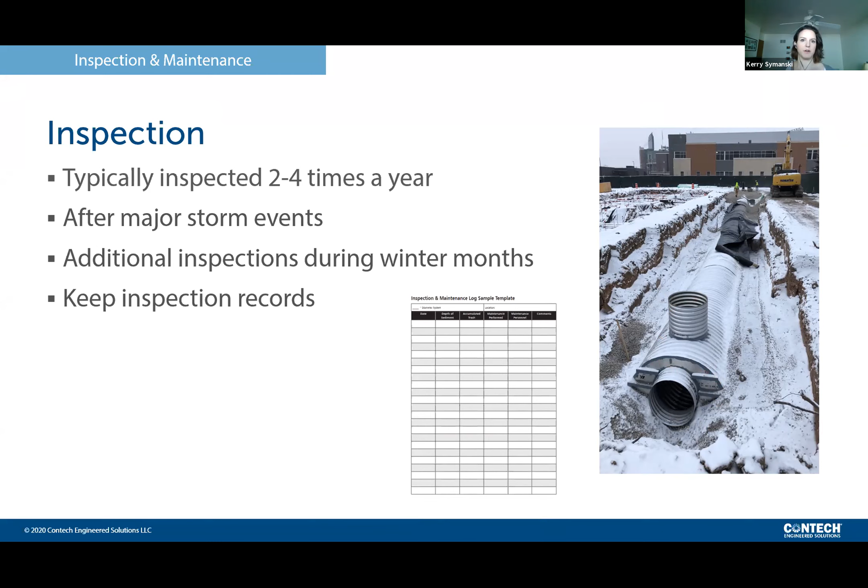As for inspection and what you're looking for, it's very much the same practice -- really, you're looking for the sedimentation buildup within the unit. I will say with CMP, you're dealing with a much larger footprint than an HDS unit, so you're not going to see a lot of sedimentation built up throughout the entirety of the system. It's mostly going to be around that inlet area, and you're checking for any trash or debris that may have clogged the discharge orifice.

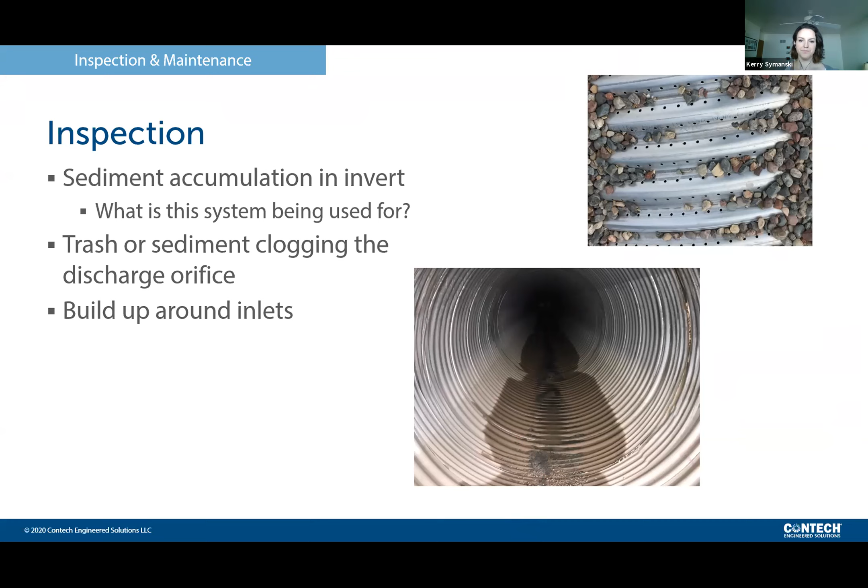Assuming there's a lot of buildup around those areas, maintenance will obviously need to occur. It's easiest to do this when the system is dry -- it'll make your job a lot easier. Going back to that previous slide here, you can see it's very easy for you to come in, bring that hose down, and clean up the sedimentation that's accumulated there.

While you can access the system and go into it, there's no need to. Vac down through the access risers, you'll have a lot more footprint than you will with an HDS, so you're not going to see as much, but it's still important to keep that clean around the inlets and outlets.

We also request that while you're doing extra inspections after winter months, it's important to look into doing spring rinsing when salting agents are used as well. There's a potential for that to accumulate in the system, and while the first spring flush will transfer most of that salting agent and sanding out, for extended durability of your product you'll want to make sure you're doing spring rinsing as well.

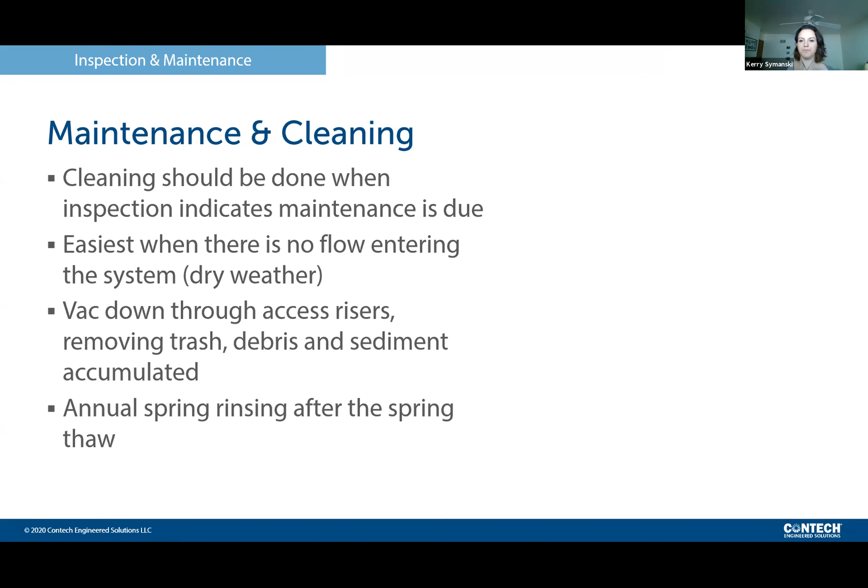If you were going to take anything away from this, it's again just to reach out to your manufacturers. This is their job, to help you with the longevity, assistance, design, and operations of these products. So if you have any questions on what material or equipment you need, or how often you should be doing it, reach out to them, reach out to your local contact, go on their websites, because all of that will be there, and they would be more than happy to assist you. But that is all I have, and I'll open it up if there's any questions.

All right, great, thank you Kerry. We do have a couple questions that came in. Can a vac truck be used to remove oil? And are there any special disposal considerations for oil versus sediment and trash?

That's a good question. You can use a vac truck for oil removal. Sometimes it'll come down to your local regulations when it comes to disposing of that, whether or not it has to be sent to a separate facility or separated from the rest of the solids and liquids, but yes, you can use a vac hose to remove oil as well. If you were dealing with a full-on oil spill, you might want to take a look at using a different product, but most typically for HDS units where you just have small amounts of oil and grease runoff from parking lots, yes, you can use a vac truck.

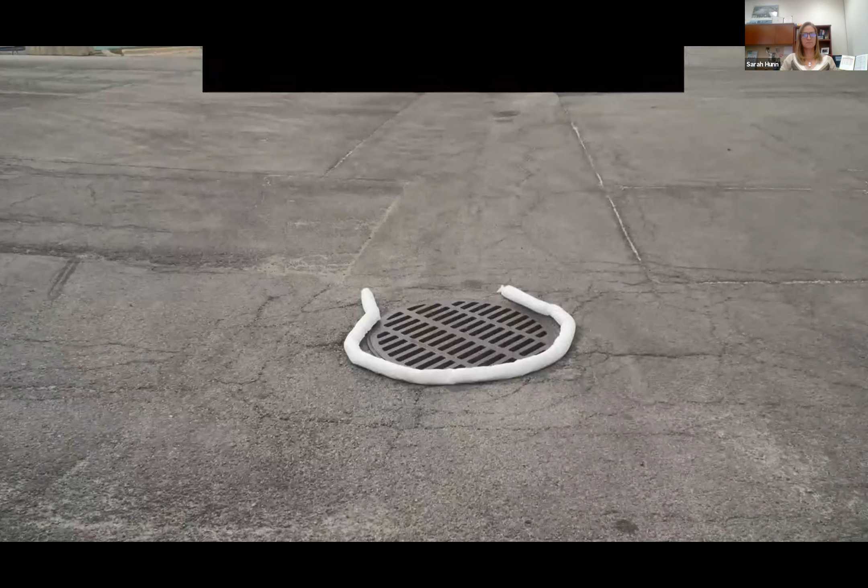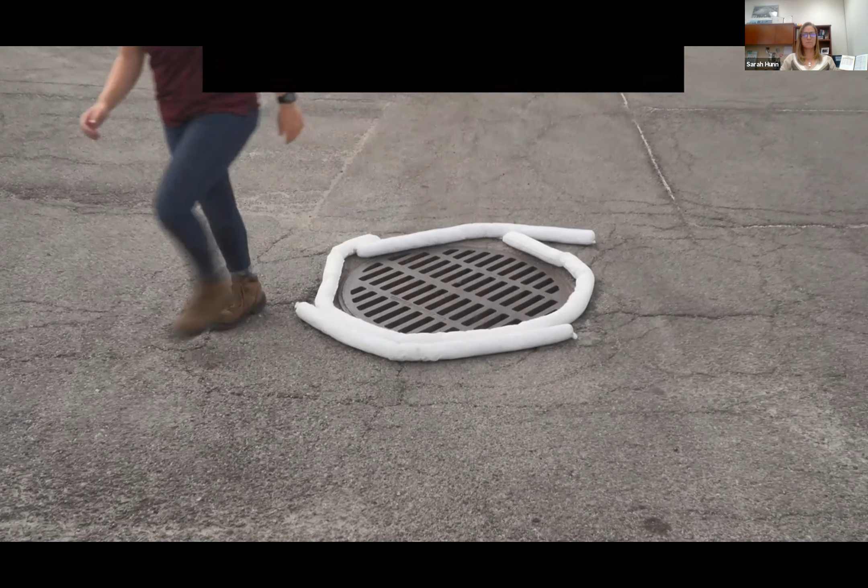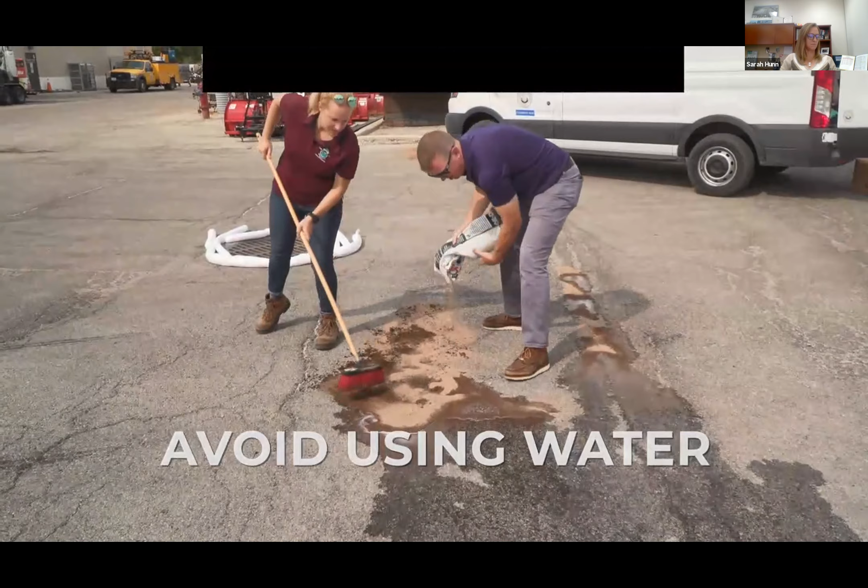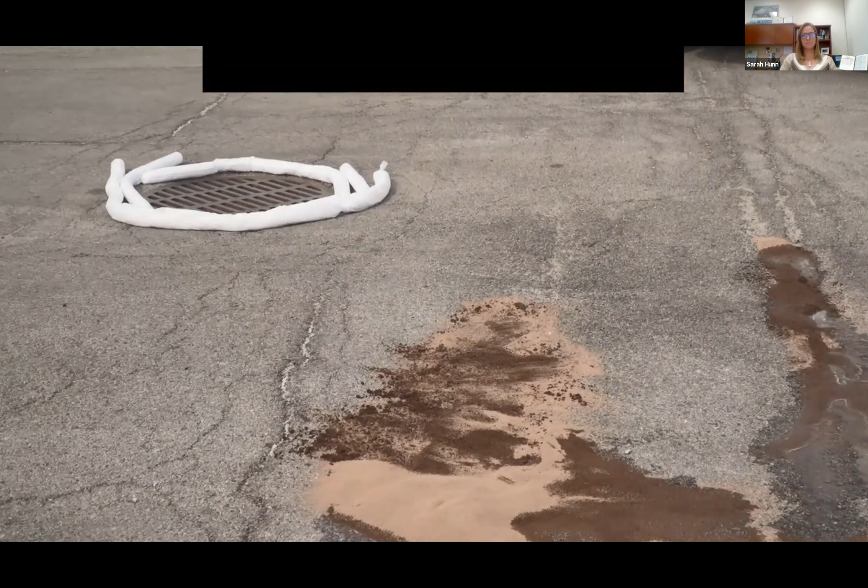Proper cleanup of spills reduces the chance of pollutants ending up in streams, lakes, and rivers. In the event of a spill, work to isolate, covering surrounding storm drains to prevent entry or encircling the drain with oil-absorbent booms. Utilize rags, pads, or absorbent granules, or oil dry for cleanup. Avoid using water to wash the area. Sweep up the absorbed spill. Notify management about spills with significant volume. Refill the used spill kit material. Create and maintain a log of spills to discover any future operational improvements. Cleaning up spills correctly prevents water body impairment. Remember, everything that goes down storm drains flows directly to our streams and rivers.